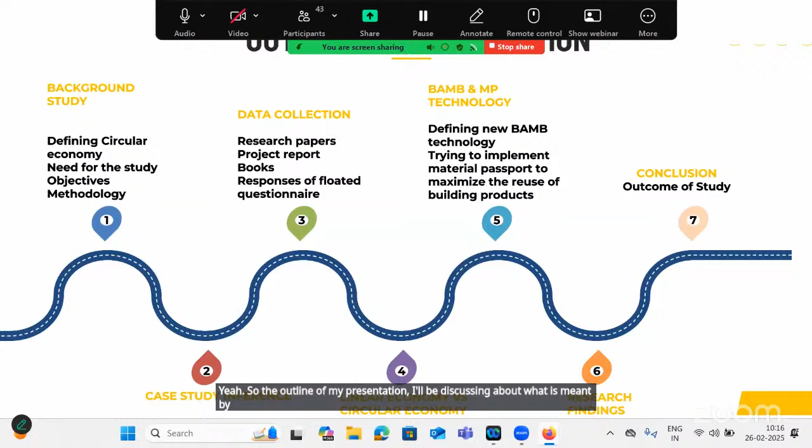So the outline of my presentation: I'll be discussing what is meant by circular economy, the need for this topic, and the objective of the study I'm taking up. Then I'll talk about case studies related to circular economy, how we procured and collected the data, and the difference between linear economy and circular economy. I'll also discuss the BAMB model, that is material processing and material passport technology, which is one of the unique things that will help with many initiatives in this area, and I'll highlight our research findings based on this study.

So, present waste management practices. This is a common waste management practice that most sectors adopt. We procure the material, manufacture it, develop it, and then after manufacturing, the material is used for different activities. After usage, the material reaches the landfill. So in all sectors, not just one, this process happens in a linear way, not a circular way.

This linear way process, due to technological development and modern materials in practice, includes many hazardous materials coming into the picture, creating an enormous amount of environmental impact and damage to the system. This is one of the very important things that compelled us to think about an alternative, and that alternative is circular economy, which I am going to highlight. Because in this linear economy process, it not only creates environmental impact and ecosystem damage, it also increases the volume of landfill, which is another major issue happening in most cities and towns.

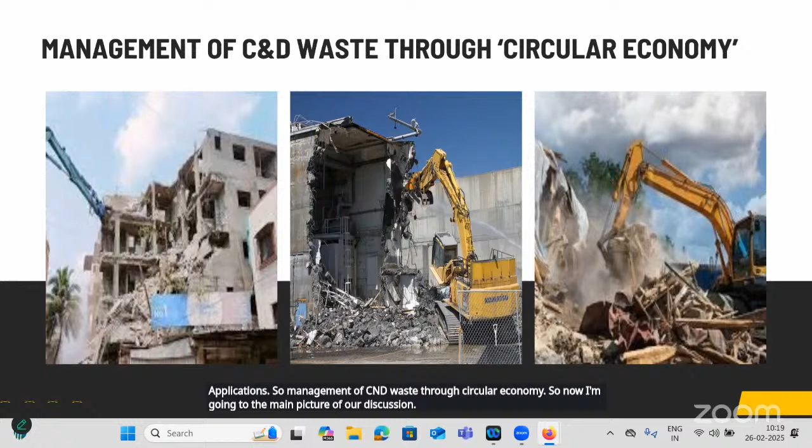So, management of C&D waste through circular economy — now I am going to the main picture of our discussion. Traditionally, construction industries follow a linear economy, meaning materials are extracted, used to make a product, and disposed of in landfill at the end of its life. Several attempts should be made to transform the industry from linear to circular system, similar to the natural world, where there is no waste. One organism's waste becomes another organism's food, because there is no landfill in nature.

As I already pointed out in my previous slide, the main significant advantage and importance of circular economy is that we have to reduce the waste reaching the landfill. That is one of the very important things we have to keep in mind. So keeping this in mind, we have to find a way how that can be possible.

So that is why we are trying to enforce the circular economy, and it can be achieved by adopting triple R, adopting 5R formula, and all these things are possible to implement the circular economy in construction and demolition waste management.

So what is the reason why we have to think about it? This is because even recent studies point out that only 1% of construction and demolition waste is recycled out of the huge amount generated. Maximum waste generation is reaching the landfill. Another pathetic condition is that in towns and semi-urban areas, it is not even reaching the landfill - it is just dumped in barren land and in low-lying areas without any proper permission.

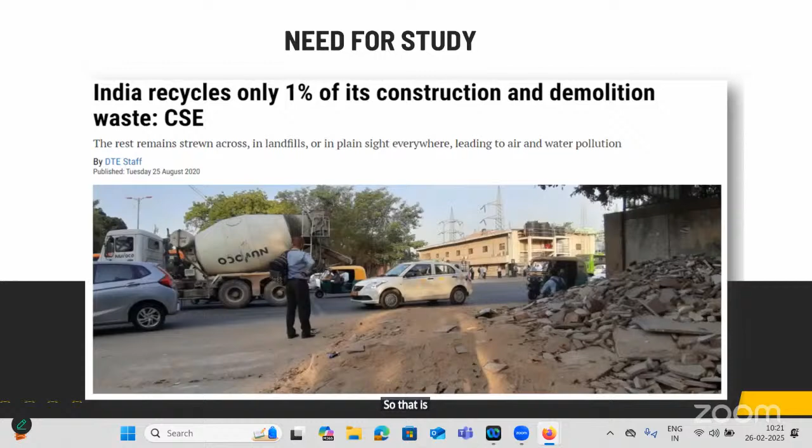So what are the objectives? The three objectives highlighted here: to compare C&D waste generation in linear economy and circular economy, promoting the reuse and recycle of existing building material products - how that can be converted into useful products - and establishing the material passport platform, which will help various actors in the construction industry access the data.

Product availability, its quality, and its manufacturer, etc. So the technique I am going to explain, what we have carried out and produced, can be taken up further by any researcher or corporate, and they can implement it in a realistic way to achieve circular economy in the real situation of C&D waste management. I hope that is possible by this discussion.

It can be achievable. So the C&D waste scenario in India - this is a thing everybody knows. The study showed that about 90% of the C&D waste can be reused in productive and profitable applications.

The very important and significant aspect we have to keep in mind, as I already pointed out, is that before constructing the building, during the process of manufacturing the material and designing the building itself, we have to think about circular economy strategies - how the material and product can be reused, recycled, and refurbished. The 3R needs to be kept in mind during the stage of designing the building and also during the stage of selecting material for construction activities.

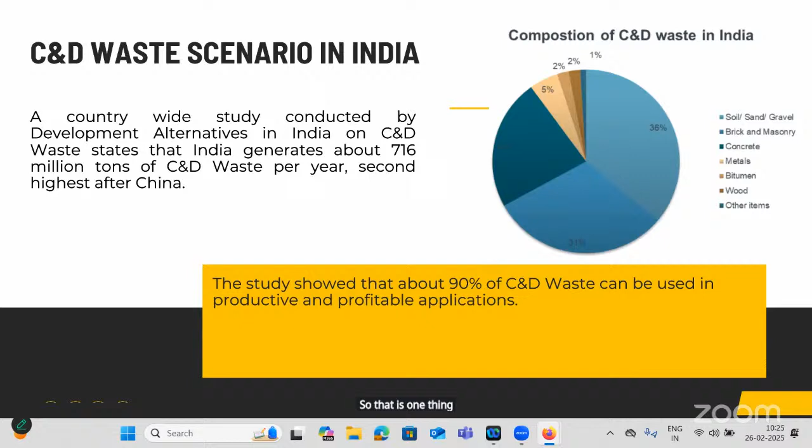According to the Ellen MacArthur Foundation, circular economy ensures that products, components and materials retain their maximum value and use. If you think about our day-to-day activities, we use n number of products. If you categorize how many products we make maximum use of, even in day-to-day activity, a simple example is the mobile phone.

If you think about the mobile, when a new version or new product comes out, we don't think about what will happen to the old mobile. In some cases the old mobile is exchanged or recycled, that is fine, but in many cases maximum utilization of the product is not happening.

Even the packaging material, when we order something online, different types of packaging materials are used. But whether that packaging material we are disposing of is properly managed, properly reused or refurbished, is not clear. That is one reason it is necessary that we think about the circular economy concept.

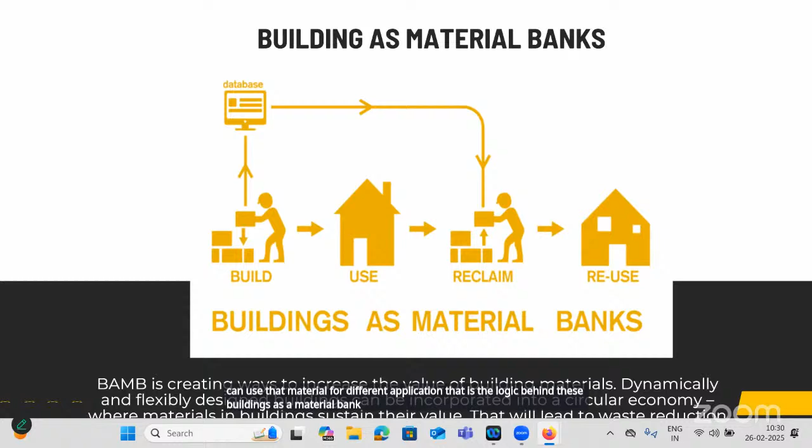We wanted to find out the awareness level of the people. We identified different stakeholders and developed a questionnaire, floated it among the different stakeholders, collected the data, and analyzed it. Based on the data analysis, we divided the stakeholders into different categories.

More than 206 responses we received based on the survey. We also conducted expert interviews from people working in the construction sector and C&D sector, and then we arrived at the outcome.

But in the present situation, the salvage value itself is not properly calculated, and the salvage value of the material is not properly analyzed or studied. This happens because they want to complete the project faster and achieve it within a short period of time, so they never think about these initiatives.

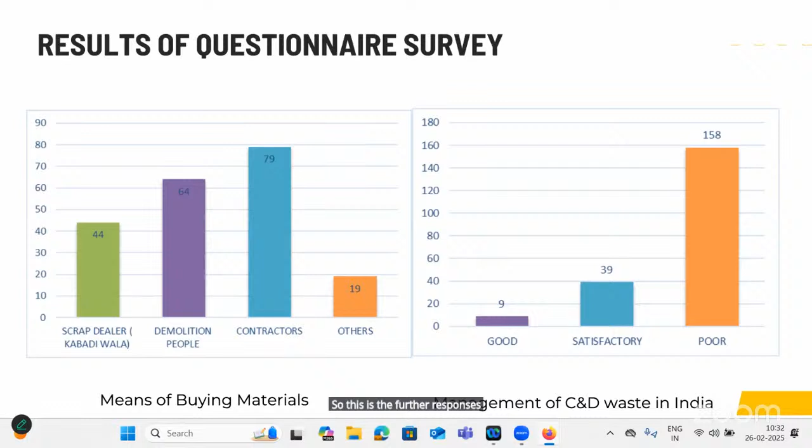Most people are not at all aware about circular economy, building materials as a material bank, or material passports. Some of those who are aware are from cities, research organizations, and postgraduate students - only they are aware about that particular thing. Most people don't have any clarity with respect to this aspect, and that is an important finding I want to present in this forum.

Then, what is material passport? Material passport is a document containing a detailed inventory of all the material resources and components of a product or building, as well as detailed information about their location, providing material with identity regarding their current use, so you can categorize the material.

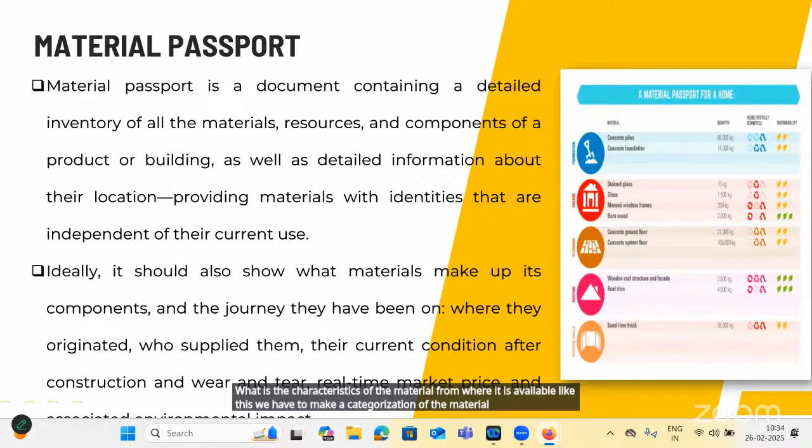Before jumping into action, it is necessary that we first identify - and in my presentation I'm going to highlight how it's possible. We have to find what is the type of material, what is its value, how much salvage value it will give, what are its characteristics, and from where it is available. Like this, we have to categorize the material and then develop this thing, so you can find out how it can be possible.

So this is another important way - buildings as a material bank. In this vision, the building itself is considered as a materialized savings account. You have to see the building itself as a savings account, that is why I mentioned it as buildings as a material account, material bank.

The material resources through which building materials, products and components are temporarily deposited into a functional element are part of the building. By harvesting materials and parts during deconstruction and renovation of the building, these materials can be reused in the construction, operation or refurbishment of other buildings, thereby reducing the need for primary resource mining.

So automatically now the resource recovery is achieved by means of this. I'm highlighting, in our today's panel discussion, important aspects that were highlighted in the topic: one is resource recovery, second is circular economy, and third is waste management. By this particular initiative, this particular study, this particular method, it is possible, and it was proven in many countries that we can achieve all these three. Circular economy can also be possible, resource recovery also can be possible, and we can also reduce the waste. Waste management can be effectively done.

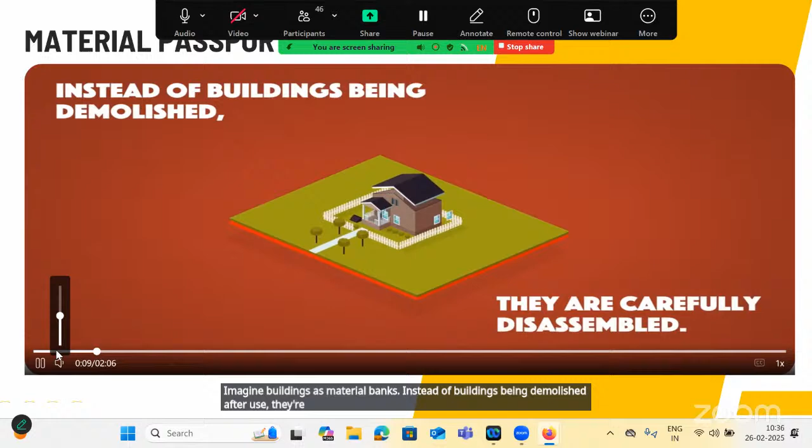Instead of buildings being demolished after use, they're carefully disassembled. Their parts are reused or recycled at the same or even better levels of quality. Instead of the traditional take-make-waste system, this supports a circular economy, where waste no longer exists.

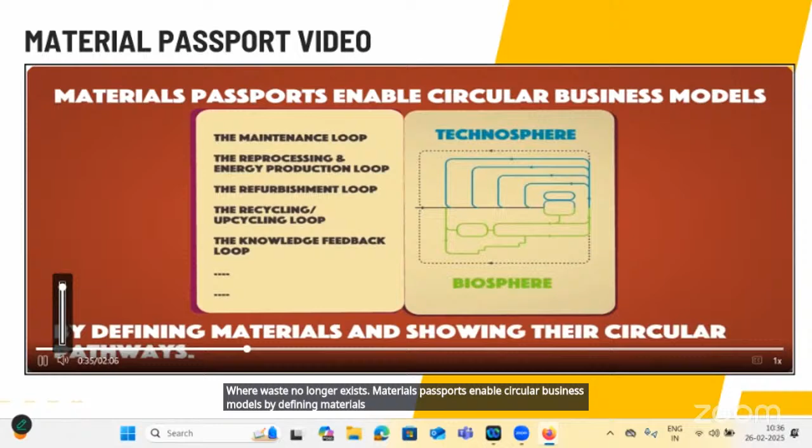Materials passports enable circular business models by defining materials and showing their circular pathways. Suppliers, builders, architects, users, and next users all provide and retrieve information through a digital platform. The goal is to put materials in continuous loops of use and reuse.

For instance, the maintenance loop: materials are maintained properly so their use period is maximized and the value for recovery is ensured. The reprocessing and energy production loop: biosphere materials can be safely cascaded into new products before they eventually re-enter the biosphere through incineration or composting.

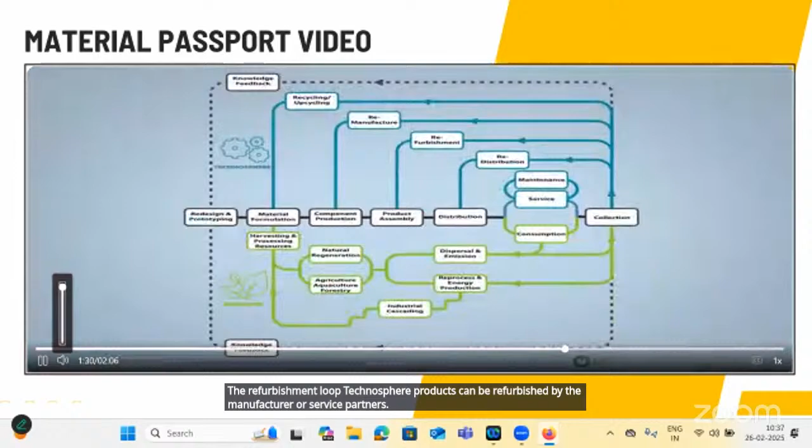The refurbishment loop: technosphere products can be refurbished by the manufacturer or service partners. The recycling or upcycling loop: technosphere materials can be recycled into new products while maintaining or improving their quality.

Many products are not yet designed for circular use. The Passports platform provides a feedback loop so everyone can optimize their materials, products, design, and services for better circular use. Materials passports, enabling the transition towards a circular economy.

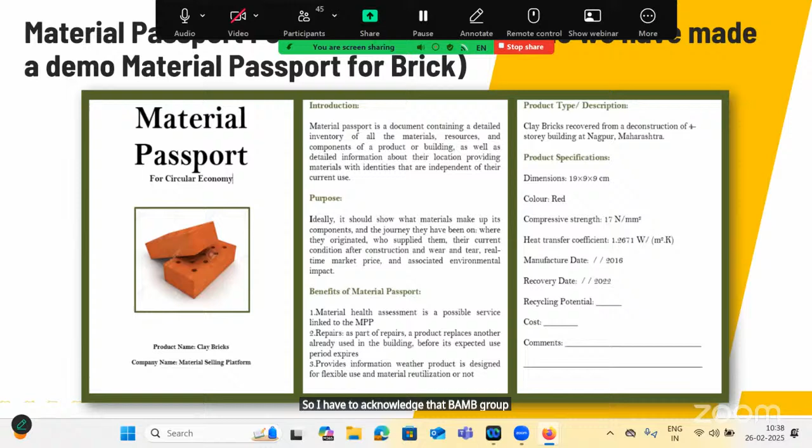So I have to acknowledge the BAMB group who have developed and created many initiatives with respect to this material passport and how circular economy can be possible in the waste management sector. But even though much advancement has been done in this area, the awareness level with respect to this particular concept in our country is very low, and there is very little patronage for this particular thing.

So it is one of the excellent ideas and concepts to transform into a business, because it is like how we purchase from Big Basket and other online grocery platforms and products. In the same way, the building material can be categorized like this, and a platform can be created, exclusively for salvage, that is demolished material.

But it is necessary that the material we are demolishing needs to be properly source segregated. That's why I said source segregation is a very, very important thing. We have to do the source segregation before jumping into action. And then the next important thing is we have to identify the characteristics of the material we are demolishing. If we don't know the characteristics of the material, then it is not possible to achieve all these things.

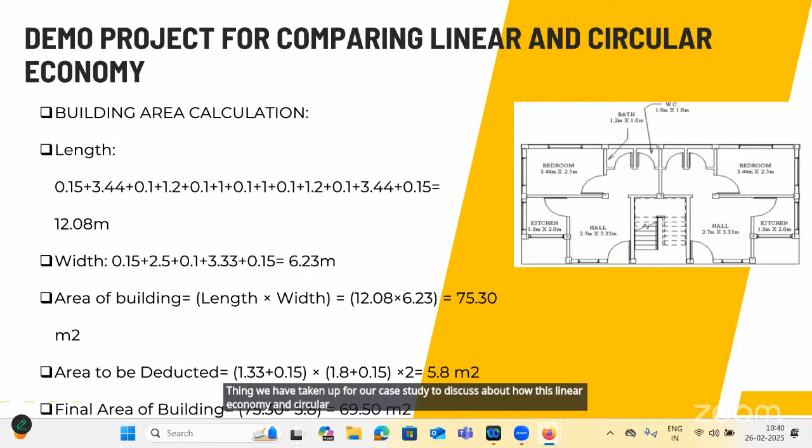Then we have calculated the C&D waste. This calculation was done based on TIFAC. There is a thumb rule by TIFAC, so we have considered the thumb rule, and based on it, we have estimated the quantity of waste generated and the quantity of waste that will be created from this demolition. So we have created this.

And then what we found is the research was conducted as a study on the Indian construction industry. The first and main important outcome is that in a linear economy, all the waste quantities get dumped near roadside, riverside, or near vacant land.

In linear economy, all the waste quantity gets dumped near roadside, riverside or near vacant land, and in some cities it reaches the landfill. It ultimately creates impact on our environment and makes higher raw material usage for new materials. This linear economy leads to more environmental damage, more ecosystem damage, more mining, and more raw material required for manufacturing new material. Therefore, it is high time to think about how that can be changed.

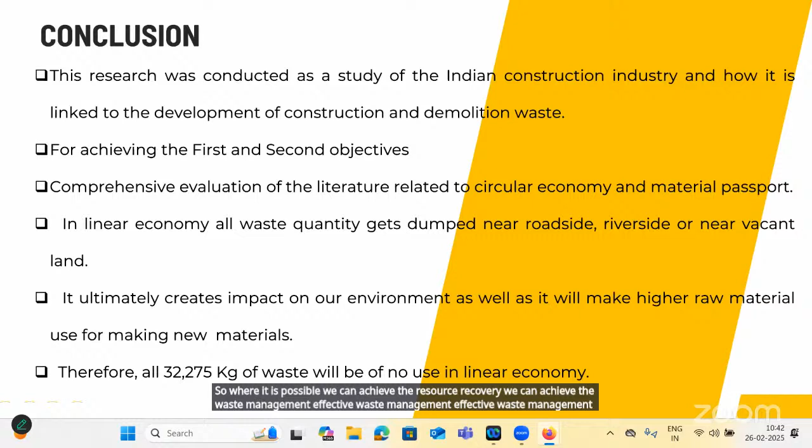So the only way is circular economy and the BAMB model. Where possible, we can achieve resource recovery, effective waste management, and convert the product into useful material. Circular economy will not only reduce the amount of C&D waste, it will also help countries achieve the target of net zero. The emissions will drastically reduce. So these are all several advantages when we try to adapt and implement the circular economy.

There are 41 single flush doors and 56 windows in our case study. We can extract them and sell them through a material platform website. I have given an example here of how we created this based on the case study. I'm highlighting this in the presentation, but it can be transformed and converted into a major revenue generation business.

For example, before demolition of the structure, we can extract the bricks which are in good shape and have adequate strength - that's why I mentioned source segregation. So total number of bricks used, out of 13,220 with respect to this case study area, it is possible we can get at least 70 to 80% of the material for further application. Then, importantly, we can sell some of the bricks through our material selling platform website and earn good money.

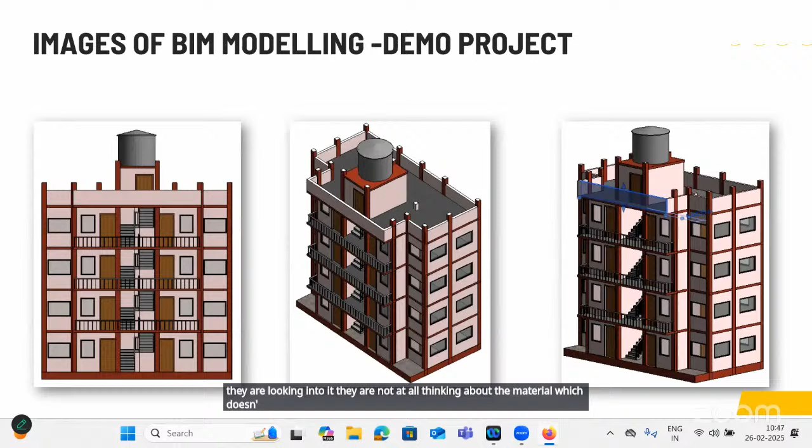So you can see here, this is the way it can be categorized. These are the different materials, and we can categorize the material and properties. All these things are achievable.

Once this is done, it is very easy to implement and follow the circular economy process, starting from the initial stage, building construction stage, to the demolition stage. It can be easily achievable.

That is why I said adopting 3R - reduce, reuse and recycle - is a very easy and simple mantra which can be implemented. This mantra will help implement circular economy, effective waste management, and also help achieve resource recovery.

So these are some of the outcomes we achieved through our research study. This is the initial characteristic of the thing, and this is available on Google Scholar. If somebody is interested, you can look into it and refer for further information with respect to this study.

We are trying to connect the cost aspect also in this particular study. Presently, the study is in progress. And this is the thing which got published in a research journal - a very famous and good high impact factor research journal. We have published this particular thing.

So how the building material can be converted into building banks, that is material banks, and how the circular economy can be implementable and made into a reality.

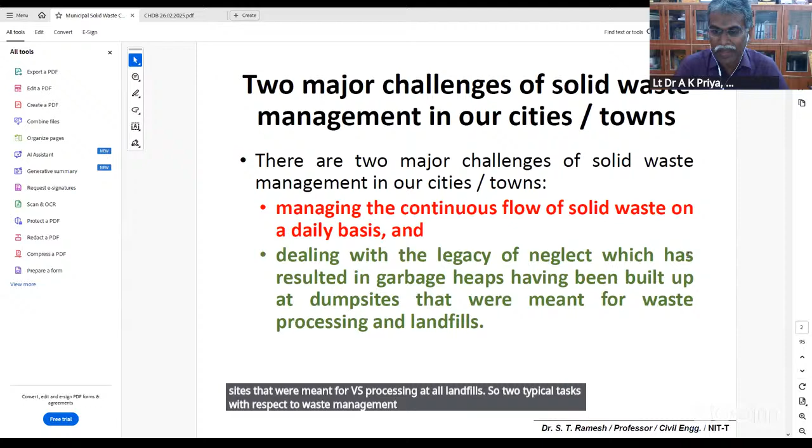So there are two typical tasks with respect to waste management: one is about daily management of solid waste, and the other is about management of legacy waste. Dumps have grown larger and higher, becoming a point source of pollution.

That's what everywhere they have started looking into. Dump sites are the major source for generation of greenhouse gases, especially methane, which contributes greatly to global warming.

There are a lot of incidences here and there: migration of leachate into groundwater, which pollutes the groundwater, and frequent fire outbreaks at the dump sites leading to air pollution. We've heard about so many difficulties in urban local bodies, especially in cities and smaller urban local bodies, with respect to leachate and fire outbreaks, which are very common in open dump sites.

These are all the possible threats posed by landfills. I think you're already familiar with the system—we don't follow proper landfill practices for solid waste disposal. We simply call them dump sites, without any liner or daily cover at daily closure. Because of that, there's a lot of leachate generation; infiltration of rainfall into the system leads to generation of leachate and migration to the groundwater.

Groundwater contains so much pollutants, and normally the leachate characteristics depend on the type of waste disposed in the dump. Recent studies have demonstrated components like phenol, toluene, benzene, polychlorinated biphenyls, ammonia, dioxins, chlorinated pesticides, metals, and other chemicals entering the groundwater.

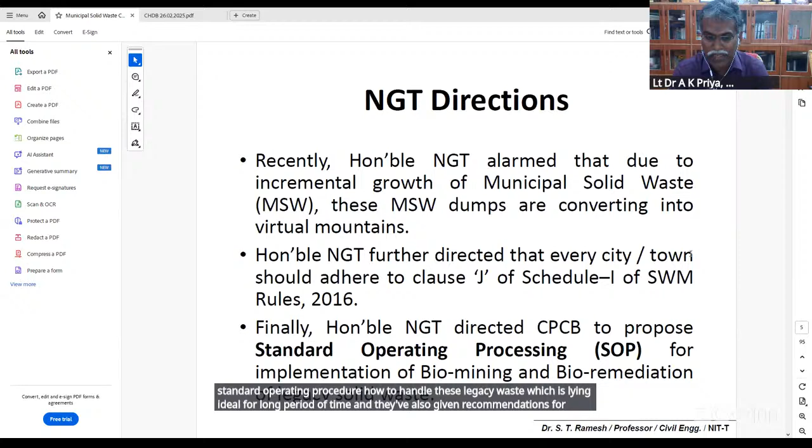You should know the rules and regulations of Solid Waste Management 2016, and when time permits, you can also read them. It clearly spells out how to manage legacy waste effectively, and the different fractions involved. Let me highlight the important duties and responsibilities of local authorities and village panchayats or urban agglomerations, focusing only on the important points with respect to the Solid Waste Management Rules 2016.

It clearly says local authorities and panchayats should investigate and analyze all old dump sites and existing operational dump sites for potential biomining and bioremediation. Wherever feasible, they should take necessary actions towards biomining or bioremediation of contaminated sites—this is already mentioned in the 2016 rules and regulations.

If the biomining option is not possible, they also recommend going ahead with scientific closure or capping of the landfill, thereby preventing further damage to the environment. So these are the two clauses.

Different governments, especially Tamil Nadu, Kerala, and Andhra Pradesh, and other parts of the country, have started looking into biomining as well as landfill mining or capping as better options to take care of legacy waste and other issues.

This law has also been mentioned very clearly in the regulations—it's not only for urban local bodies, it applies to outgrowths in urban agglomerations as well; they should also adhere to these rules and regulations. This includes cantonment boards, panchayats, industrial and institutional townships, railways, and defense establishments. Whatever I discussed earlier in the subclause is also meant for these organizations.

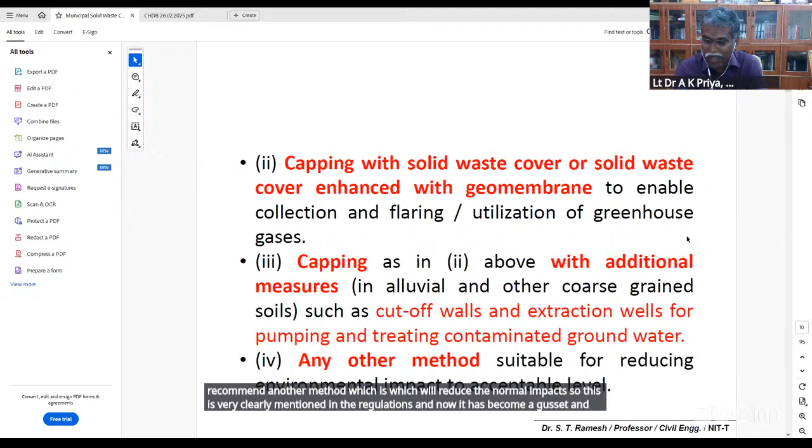Now it has become a gazette, and urban local bodies have to mandate the requirement mentioned in the Solid Waste Management Rules 2016. It is very clear, and they have mentioned two logics: you go for bioremediation and biomining, and before that, you make sure you also survey and assess the total waste lying idle in a legacy waste dump site.

There are a lot of challenges to go ahead with total station survey or drone mapping, and it's somewhat difficult with dumped waste below the ground. Some places it's disposed in a quarry or low-lying area where we may not be able to showcase when it started or assess quantity, because after project finalization, for mining or capping, payment to the contractor is based on volume. It's very difficult to estimate that volume.

They have mentioned very clearly you can go either with total station survey or drone mapping, and then do a precursor study with the history of the site and extensive composition analysis. Thereby you can recommend either mining or capping. That's the logic they've given.

They have also mentioned clearly that you should follow some normal parameters to study the existing condition, or baseline studies, which includes soil already contaminated with heavy metal, and thorough analysis of water. You should also be familiar with rainfall details in the locality, soil type, surface hydrology, topography, and wind direction.

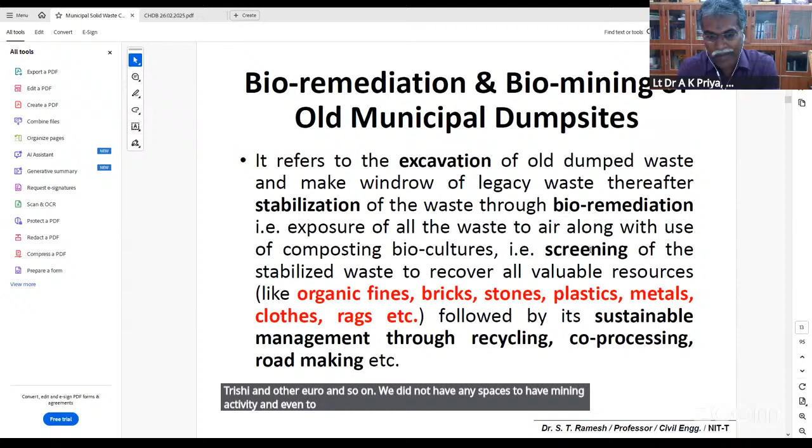Once disturbed, it becomes huge in volume, and handling this huge volume of legacy waste is very tough. It's somewhat difficult to fix how to go ahead with the mining process for a larger site, especially for Trichy and Erode and so on - we did not have spaces for mining activity or even to store segregated material. This is a big challenge with respect to mining projects.

These are the processes or steps clearly mentioned: go for excavation and stabilization of the biomass. We felt all the legacy waste has already been stabilized or partially stabilized, so there's very little scope for further stabilization with organic matter and complete remediation through augmentation of microorganisms. Remove the moisture, bring it down to less than 20 or 25%, and take it to a trommel mill.

And they have a set of sieves or screen openings where you could separate these materials in a segregated manner. Thereby, you could go for sustainable practices through recycling and co-processing. That's what they have given.

So this is the overview, and in the SOP they have mentioned very clearly: mining, okay, you can start, no issues in that, but before that you have to stabilize the complete waste lying on the site by adding biocultures, or you can blow some sort of aeration. You enhance aerobic degradation of the organic matter, then go ahead with the screening of waste.

And there are two major fractions. Whatever is more than 150 mm, I could make it very easy because these sizes are very big. And 30 to 80 mm normally goes directly to industrial needs as a supplementary fuel. We call it refuse-derived fuel.

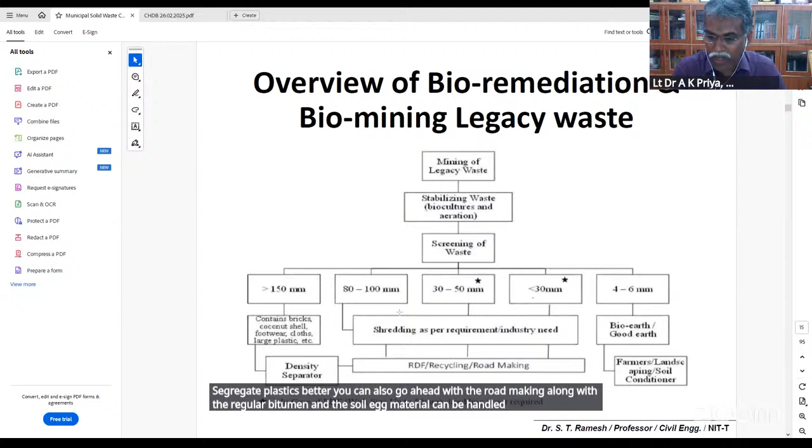So this is what I've explained earlier. The first step is to loosen the solid waste, as I already mentioned. The existing legacy waste dump sites have a compacted density of about 0.9 to 1 ton per cubic meter.

Then for the stabilization actions to happen, you have to loosen the solid waste and bring down the density to almost 0.5 to 0.6. Imagine our situation—if you loosen it, volume is one factor, and it becomes possible for infiltration during any heavy rainfall. Managing the solid waste during rainy days was very, very challenging.

Then the second step, to enhance the stabilization activity—in some cases there could be partial degradation of solid waste, and you can also add biocultures to enhance the composting process. This is called bioremediation, and you can dry the segregated solid waste after bioculture or biostabilization, making it amenable for screening and so on. This is the second task.

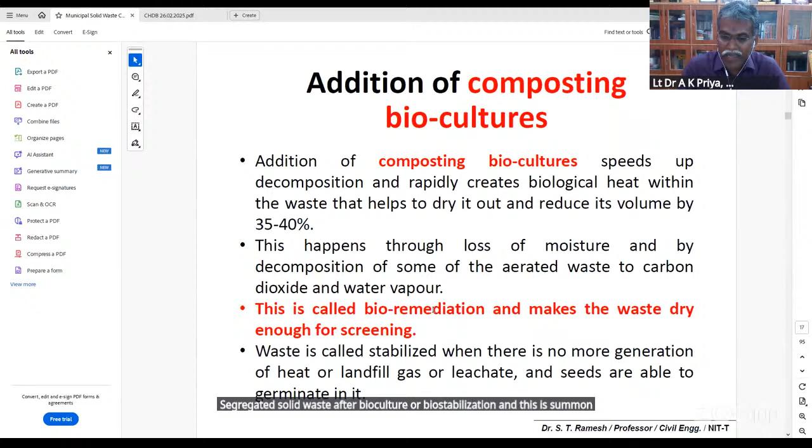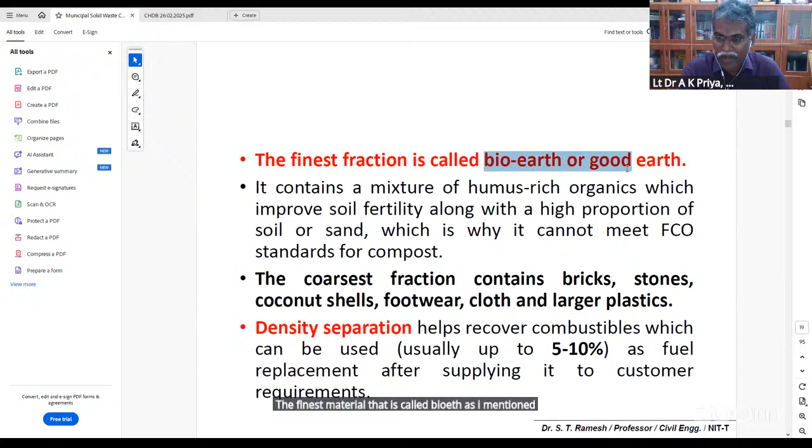Thereby, I could separate large amounts of material. The finest material is called bio-earth, as I mentioned earlier, or we now simply call it soil-like material, because it is similar in all respects, but it's not soil, it's a soil-like material. Coarser fractions like brick, stone, coconut shell, footwear, cloth, and other larger particles or plastics will go directly to recycling agencies.

And in the plants, we also have density separators. We could separate the combustible matter, almost 5 to 10%, which is in the legacy waste. Then lighter fractions, as mentioned earlier, mainly predominantly plastics, maybe it lost its value or may have some use. The government has given recommendations that it can be used in hot mix plants, and thereby it can also be laid on roads, so-called plastic roads, as you may have already heard about.

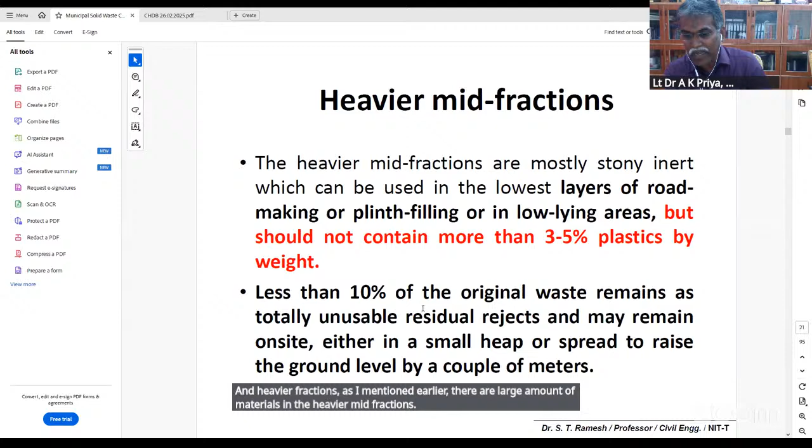And the major portion, what I call refuse derived fuel, will directly go for co-processing in the cement kiln. If it is more than 50 mm, it may require shredding. Less than 50 mm, you may not require any shredding, directly packed and given to a cement kiln for complete destruction. Heavier fractions, as mentioned earlier, there are large amounts of material in the heavier fractions, and sometimes it will also go for landfilling and so on.

Getting into the site, there are different ways mentioned to stabilize the organic matter. Without stabilization, segregation is not at all feasible. And if I do segregation without stabilization, it may create a lot of problems of environmental degradation. So they have given different logics to go ahead with the stabilization activity.

Number one, biomining through a tractor tiller by windrows in the site itself. Or you can go for biomining through a trench method, or biomining through a cone, or they may insist on the windrow method for very spacious landfill sites. And lastly, you can also spread the legacy waste in a thin layer, one layer and above.

By looking at the points, it seems very easy. But when you get into a real site, the stabilization of the biomass is a very, very challenging task. Imagine our situation in Trichy, we have almost 47 acres of land, and we don't have even space to form the different windrows to stabilize the organic matter.

You can spread the legacy waste to a depth of 150 mm, and mist-spray with biocultures. If there are larger objects, you can hand pick them and form windrows for the remaining waste. Turn the windrows every 5 to 7 days, and after 6 weeks, you can go for simple screening methods.

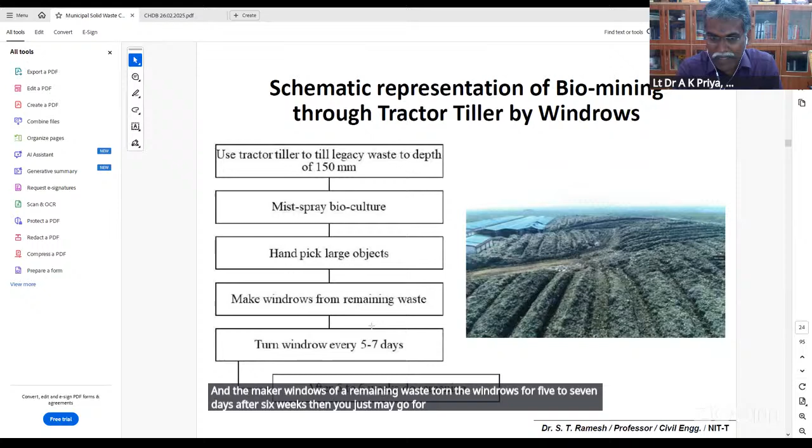It has also been mentioned that besides the 150 mm layer, you can also go for trenches, almost 1.5 to 2 meters deep, or even 2 to 2.5 meters in the site itself. You can spray the biocultures in the trench, then form a windrow and turn the windrow for 5 to 7 days.

Then after 5 to 6 weeks, the stabilized biomass is taken into the screening area for segregation of solid waste. We also tried the cone method in Trichy because it is easy to do.

You can drop the solid waste from 2 to 3 meters height and form a cone, and mist-spray with bioculture. Every 2-3 days, you turn the cone to aerate it, and after 5 to 6 weeks, you do a simple screening.

The windrow method is again very common. If the landfill site allows, you can form parallel windrows throughout any vacant areas available, then turn the windrow on a weekly basis. You can also mix 2-3 windrows together.

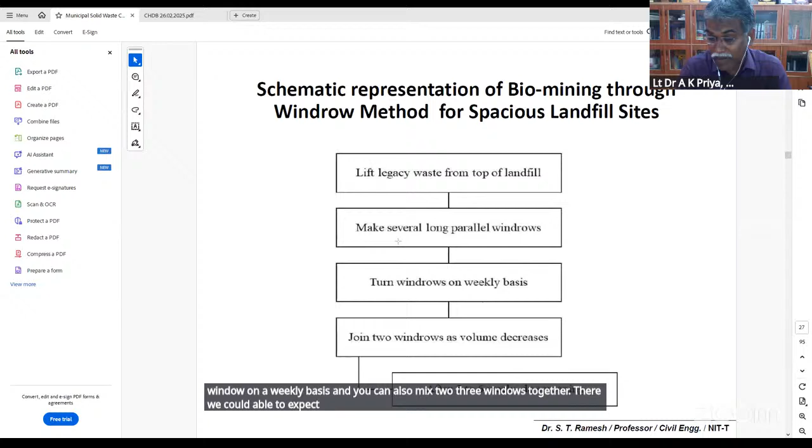There we can expect a volume decrement, and after 5 to 6 weeks you can go for simple screening methods. And for the thin layer method, if the landfill site meets your space demands, you can also plan for layer by layer spreading.

You spread over the solid waste, the legacy waste layer and layer above, and turn the windrows. Then mist-spray the bioculture, and after 5 to 7 days, go for a complete turning in. After 5 to 6 weeks, then you go for a screen.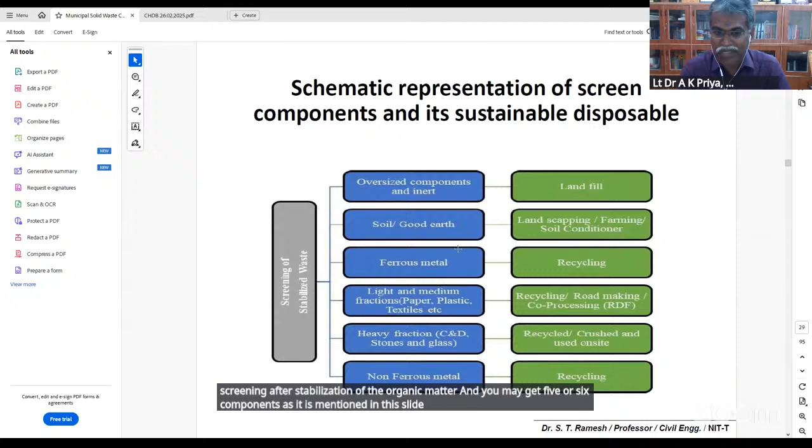So this is the complete sustainable disposal of the legacy waste, as mentioned very clearly. Then just go for simple screening after stabilization of the organic matter, and you may get 5 or 6 components as mentioned in this slide: oversized component, good earth or soil-like material, ferrous material, and light and medium fractions. We could find different types of plastics in the legacy waste, heavy fractions like construction and demolition waste, and non-ferrous metal.

They also recommended going ahead with recommended disposal options. Oversized material will go for a secure landfill operation. Soil-like material, if good with nutritional value, will go for landscaping, farming, or soil conditioner. Ferrous will go for recycling, and plastics will go for RDF in a cement kiln. C&D waste will go for recycle and also be crushed and used on site. Non-ferrous material will go for recycling.

So this is the model we have followed for most of the cities I've experienced in, like Trichy, Erode, Tuticorin, even Tirunelveli and also Salem, and we have done for a capping process. This is the typical model where you can manage the complete legacy waste without much difficulty.

The MSW dump sites, or we may simply call them abandoned sites or legacy waste, are enhanced by bioremediation and also biomining activity by the appropriate agency appointed. We may get different products like RDF, recyclables, and compost, and the inert material, the soil-like material, along with recommended disposal options like cement industries.

Recyclables will go to respective authorities, compost will go for landscaping and marketing, and rejects will either go for low-lying fill or some sort of scientific landfilling activity. So thereby I could be able to close the continuous representation as an operating model. That's what has been recommended, and we have followed this model in different sites.

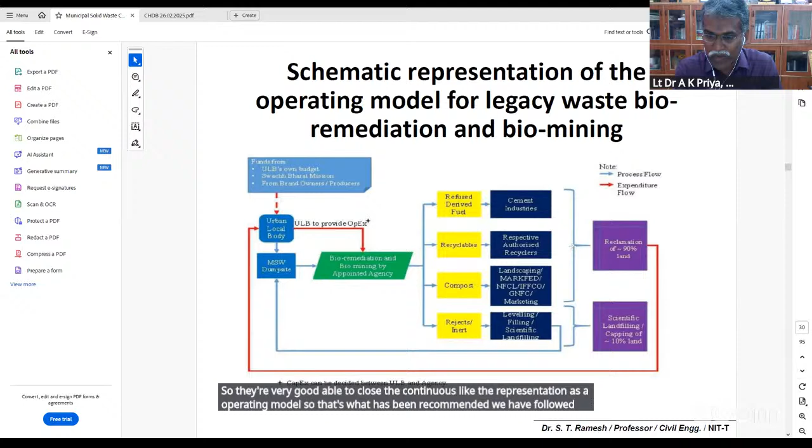Okay, let me go on. Probably you may appreciate later the effort we have taken in the biomining activity for some of the sites. I may be presenting phase 1 results and studies from my experience in Trichy, but not all together. The project is still going on, and we are also moving into a circular economy kind of approach, going for technology transfer demonstrations and so on. I'm probably not able to share all these details, but whatever we have done in biomining activity, I'll be sharing.

The site investigation study area, you would have heard about it, is on the highway, Ariyamangalam, about 13 or 14 kilometers away from the main Trichy area. Its population as per 2011 status is about 9.17 lakhs, and total waste generation is about 450, now reaching almost 550 to 600 metric tons. Total waste collected is only about 80%, and the method of collection is door to door, with disposal only to a landfill dump yard.

Otherwise it is named as Ariyamangalam Compost Yard. Earlier it was a compost yard, now it has turned into a legacy waste storage. Trichy in particular has insisted heavily on door-to-door collection; only the leftover material which is not biodegradable comes to the site. Others go directly to a decentralized composting facility. I think in the city we have almost 55 to 60 decentralized composting yards.

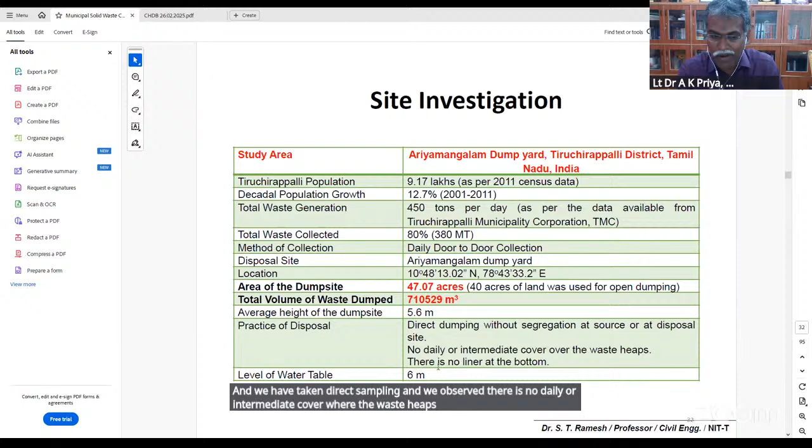The site is 47 acres, adjacent to a highway. In phase 1, we assessed 7.1 lakh cubic meters of solid waste, and it extended to phase 2. In phase 3, we gave a technical report to mine the solid waste below the ground. The average height of the landfill site is about 5.6 meters. We took direct sampling and observed there is no daily or intermediate cover over the waste heaps, and no liner at the bottom. The water table is below 6 meters. So this is about the site investigation.

Now you can look into the dumping site, and it is almost all legacy waste. I think it started way back in 1984-85, so it is almost 30 or 35 years old, and completely degraded, but it still occupies space.

As I mentioned, it becomes a virtual mountain, a solid waste mountain. We went with a systematic divide and conquer approach, as mentioned in the SOP (standard operating procedure) by CPCB. We had a lot of challenges on how to assess it. For example, in regular assessments like volume estimation of sand or mined material, it's very easy—you can use simple trapezoids. But here, it's not properly shaped like a trapezoid, so it is very, very difficult.

So we invited 4 or 5 different vendors to the site, and after seeing that it's completely packed across almost 47 acres of land, none of the vendors were in a position to execute the survey. I got a startup involved, and we educated the surveyor and explained the typical tasks with the mission projects under Smart City. They gave some positive thought and provided me with a status update.

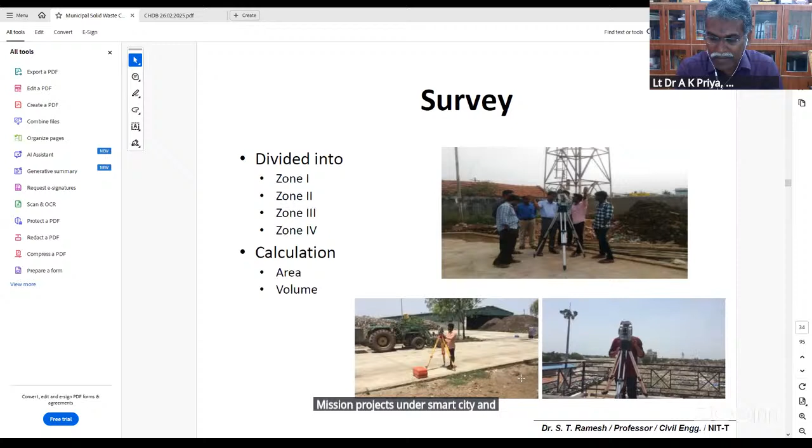So we also went with a strategic plan where we could identify zones where the legacy waste started—around '85 or so—by referring to old records. We divided the total 47 acres into 4 zones: zone 1, 2, 3, and 4.

We went with a typical survey using the total station, and we were able to assess almost 7.1 lakh cubic meters. I think this was in the pre-feasibility study report given around 2018, just before corona. We demarcated the boundaries for zone 1, zone 2, and zone 3 along with the volume. So with that, the first step was successfully completed.

We took almost 1 to 1.5 months to fix the boundaries as well as the different viewpoints and high points at the top of the landfill area or legacy waste dump area. We were able to pick up the points, plot them, and assess how much quantity of waste we had.

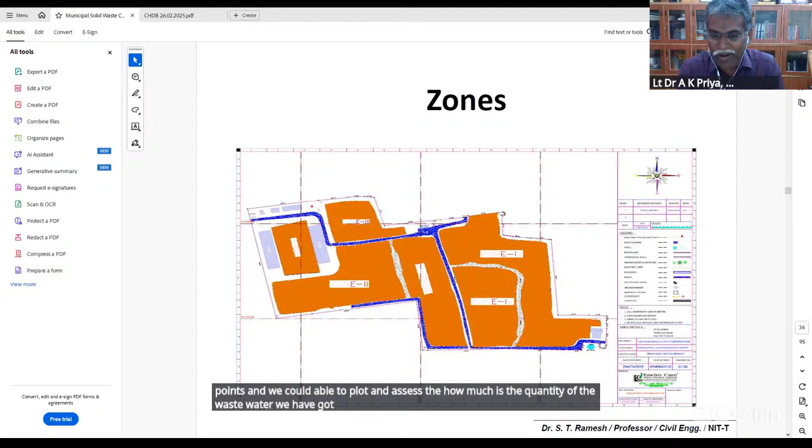The second important task was to convince the administration that we could go for mining. The typical logic is: if I do mining, I could recover as much material as possible and give the reclaimed land back to the corporation. Thereby, the 47 acres of land can be used for some other purpose.

Regarding solid waste sampling, some literature simply suggests auger boring, machine boring, or simple open pits. But none of these techniques were useful here—it is very, very difficult.

We went to a maximum of almost 3 meters depth with the backhoe, and we were able to take samples at 1 meter intervals. These were labeled and brought back to the institute for consideration, and we assessed the composition of the past deposited waste—for example, waste that was maybe 15 or 20 years old.

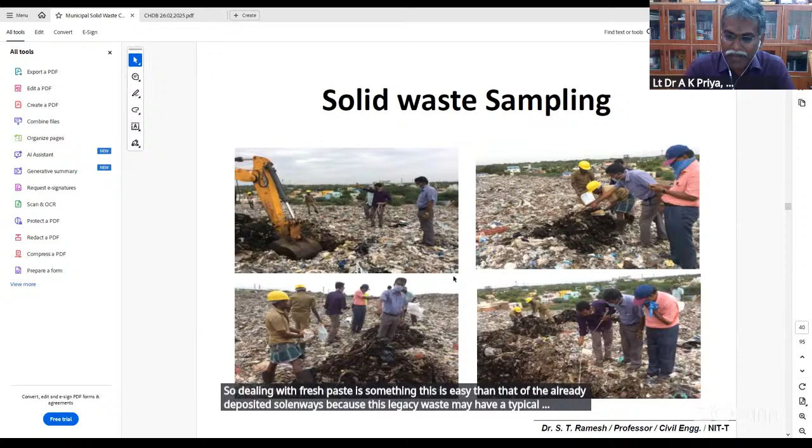We also characterized the solid waste once identified. Dealing with fresh waste is easier than already deposited solid waste, because this legacy waste may have typical components and parameters with respect to depth. That is very challenging. So we brought samples to the laboratory and did extensive work.

We performed segregation practices and went through literature on what has been followed in developed nations. We came to a conclusion about the percentage distribution with respect to depth, and it was an appreciable, positive outcome that we could observe.

Almost 25 to 30% was resource recovery material, and other than that, a large amount was humus. Humus—initially we called it that, but now we've changed the terminology to 'soil-like material.'

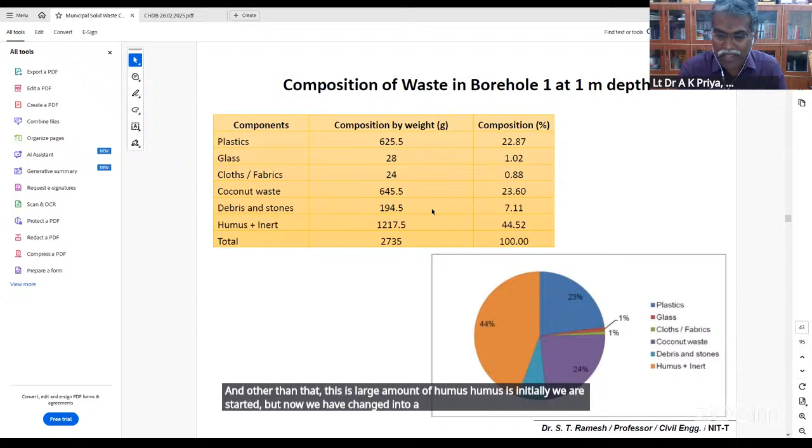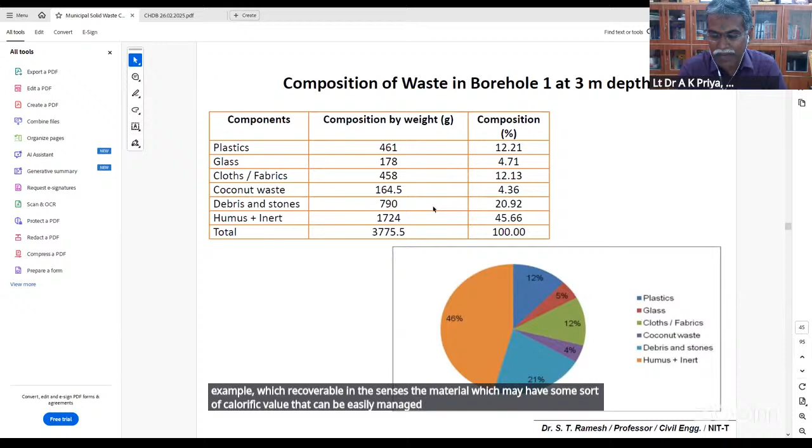In most cases, with respect to 1 meter, 2 meters, and 3 meters depth, we could see considerable portions of recoverable material—recoverable meaning material that has some calorific value, which can be managed in a recommended cement kiln or thermal exposure. That's our logic. We also projected the data with maximum and minimum values with respect to different fractions.

You could see on the left hand side different compositions. This composition is not fixed. With respect to depth, we could also find different fractions, and we have demarcated with different composition and projected. We have also gone with proximate analysis and ultimate analysis to showcase that we could go for mining activity, and after that take up important refuse derived fuel and soil material which can be further considered. That was our objective.

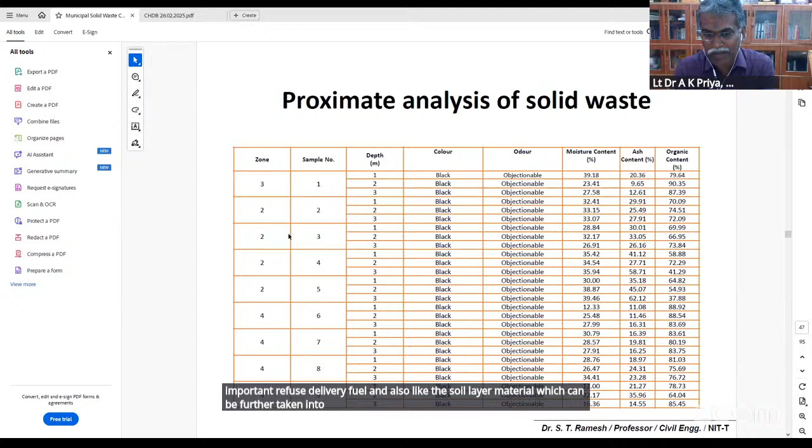NIT Tiruchirappalli gave a feasibility report as a proposal to Tiruchirappalli City Corporation, because the waste to be managed for phase 1 is about 7.5 lakh cubic meters. We projected this data to the government along with the possible approach we presented, and the government gave approval.

Yes, we can go ahead. They took 1 or 2 urban local bodies like a corporation as a sample, and allotted almost 49 crores to Tiruchirappalli City Corporation to execute the biomining activity. So the main point is it's easy to say, but we have a lot of challenges to go ahead. That's the logic they mentioned.

With this data we got the money, and the corporation identified the vendor. The vendor was also very new to the system, and we brought some new logics to waste management, supporting the vendor technically. One fine morning we started the biomining activity at the site.

The major task was that there was no space, sometimes, to even plan a 150 or 200 metric tons per day biomining plant. It was very, very difficult.

So we relocated one portion of the solid waste to another area. We could establish one initial plant of about 30 tons per day. Then subsequently it was added, and after Corona, for the complete closure of the legacy waste to the road level, we completed it within about 2 years with a specified target of almost 1,000 tons per day, which we achieved within 2 years.

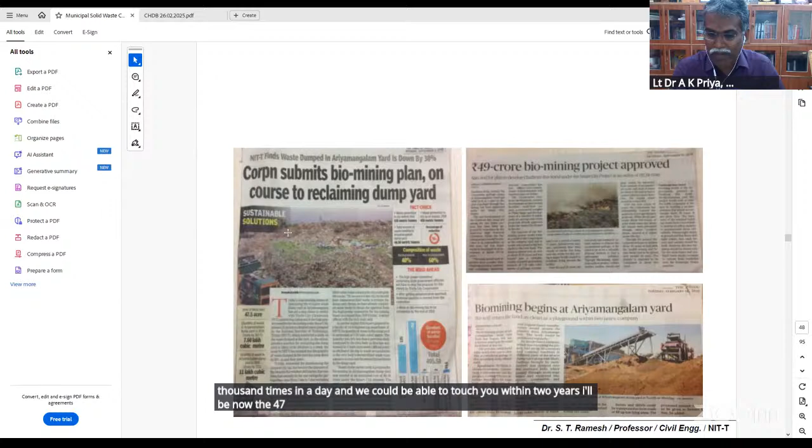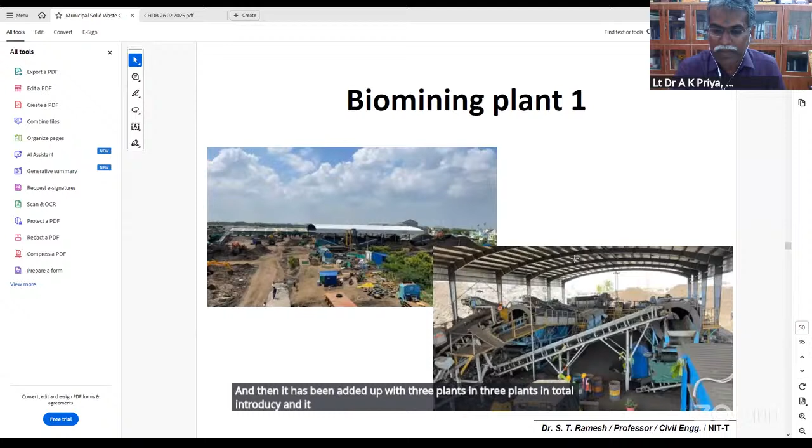Now the 47 acres of land has been completely recovered. This is the inauguration. What you're seeing on the right hand side is the relocated area, where we could install the initial plant number 1. Then it was added up with 3 plants in total in Trichy, reaching up to 1,000 metric tons per day of legacy waste.

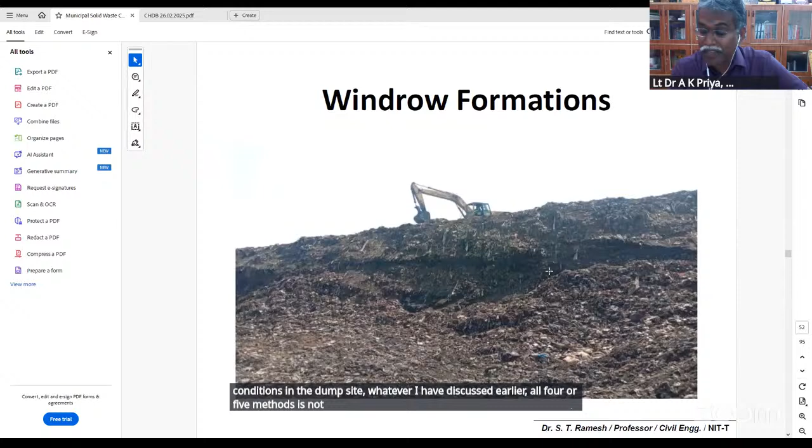These are all the plants we installed, and this is the initial condition in the dump site. As discussed earlier, 4 or 5 methods were not feasible to implement in the real field, so we followed windrow formation by the cone method. That was feasible.

Cone method is very simple: you disturb the solid waste and take it to almost 1.22 meters height with the boom line and drop it. Thereby the complete legacy waste gets loosened up, allowing oxygen entry and aerobic conditions in the system. Then you can expect some degradation, and you could see a lot of smoke coming out because it was already compacted to a density of 1 ton.

If loosened, there's a possibility of heat buildup too. We had a lot of difficulties, but luckily we did not have any fire, though we had a lot of difficulties in operation. We formed windrows like this by cone method and windrow turning, since we were also new to these systems, and we could achieve at least complete stabilization.

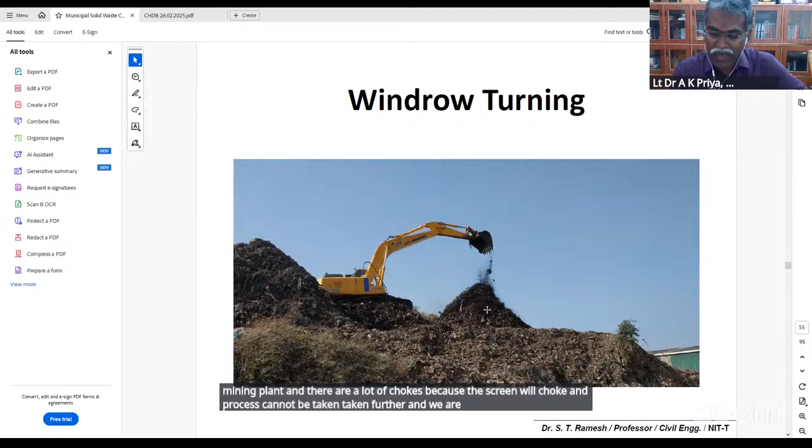Without stabilization, if taken into a mining plant, there are a lot of chokes because the screen chokes and the process cannot proceed further. We understood the situation and, as much as possible, eliminated the moisture content to up to 20%. In some cases we also sprayed deodorizer because it is near the highway.

Once you disturb the solid waste, there are inbound gases which also emanate from the legacy waste. It creates a lot of nuisance, so we have used deodorizer and bioculture in between, and to stabilize the organic matter, we have also done that.

After stabilization, it is brought to the mining plant where biomining is done. The problem is how to quantify the material again, because payment to the contractor is based on volume or weight. Initially they did not allow for a weighing basis, but asked us to go for simple volume methods, so payment to the vendor is made in terms of meter cube.

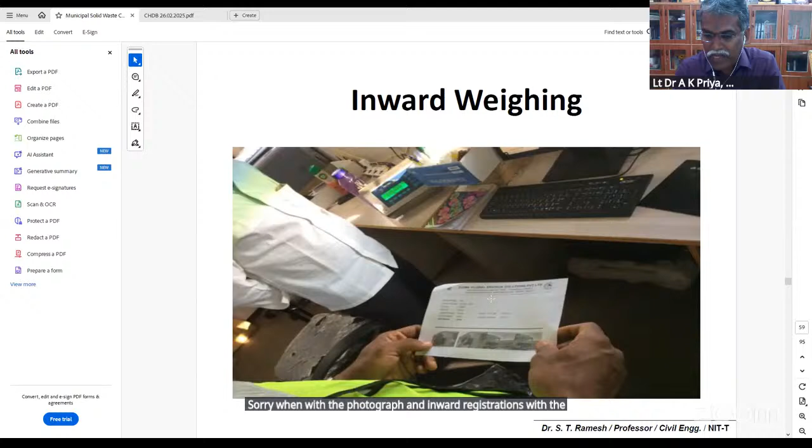There were a lot of challenges to quantify how much legacy waste is being mined and segregated, so we completely automated everything on site. Every truck that comes into the biomining plant is captured on video and photograph, with inward registration and vehicle number. They go for weighing, get into the biomining plant, come out and get an empty weight, and get a trip sheet. Everything is monitored with surveillance, and I could monitor from my office also.

Plant automation is done by the vendor, and every set of operations - you can see on the right side the SCADA operation - with conveyors, belts, and trommels, everything is automated. Thereby we could meet the demands.

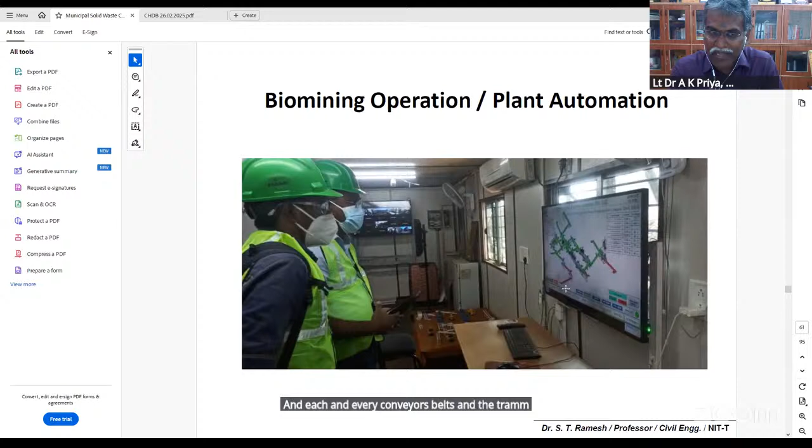We also created an ERP system where you can see the vehicle number entering, the trip sheet, the time it entered the system, the empty weight of the truck, the loaded weight, and the net weight. The net weight is again converted into meter cube terms, since payment to the vendor is in meter cube terms.

The Swachh Bharat Mission solid waste management rules mention the legacy waste compact density falls between 0.7 to 0.8, in some cases 0.75 to 0.85. We ensured that for every vehicle, we determined the compact density and loose density by taking samples from individual trucks. We had a big team monitoring every truck for the density of each load of legacy waste brought to the mining plant, making it easier to convert to meter cube for payment.

This is the procedure we established, similar to using a small box of 1 foot cube. Since that may not be sufficient, we would convert to a 1 meter cube box, repeatedly weighing multiple times to find the density of the sample.

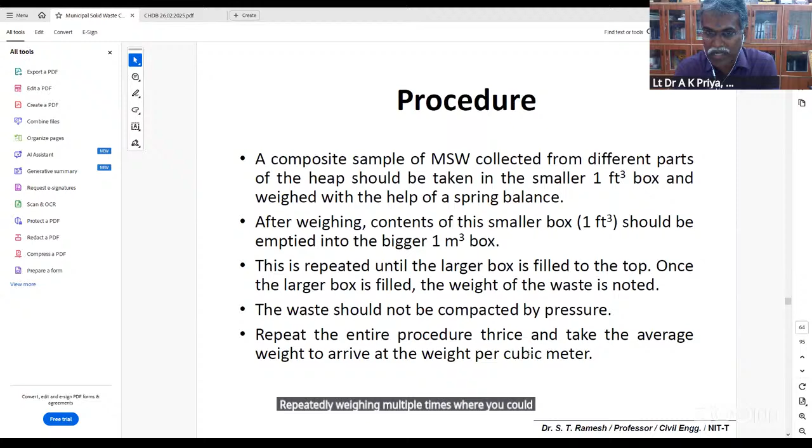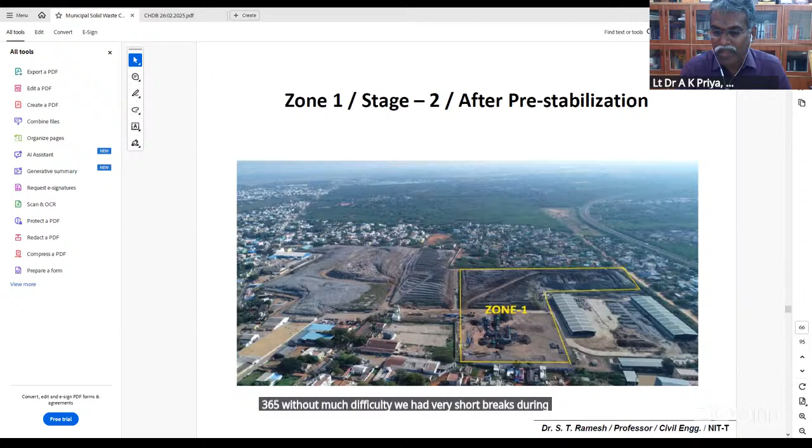Imagine our situation - I could make my plant work for 1,000 tons per day, so almost 30 or 45 windrows with 1,000 tons would be ready for subsequent operation. We managed with effective inventory management. The plant has run almost 365 days without much difficulty, with only short breaks during the Corona lockdown period, and beyond that we operated without much difficulty.

Now you can see how Zone 1 has changed, now appearing with dark brown color. These are all the disturbed solid waste, and here and there you can see a lot of windrows being formed. These are all the mined fractions - one is bio-earth, that soil-like material.

We have also given a deadline, and the vendor has to clear the sites without much difficulty, whatever is being mined out, within a maximum period of one month. Only then will certifications be given and the vendor recommended for payment. So this is again a big challenge for us.

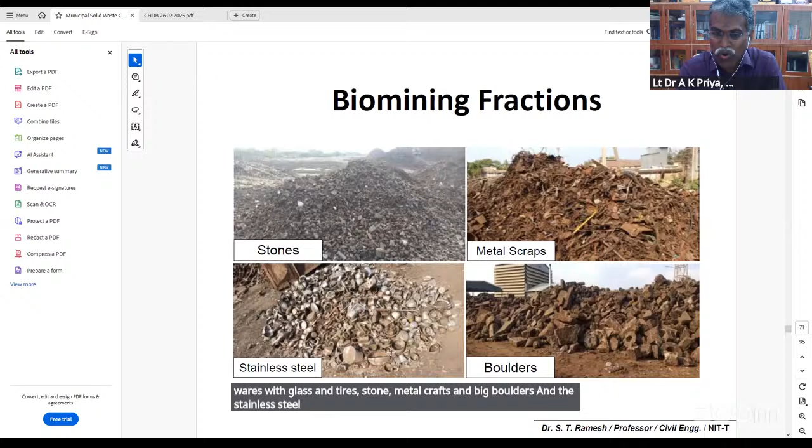Now you could see different mined fractions like PET bottles, footwear, glass, tires, stone, metal scraps, big boulders, stainless steel, and so on. That will be given to the respective recycling vendor, and without much difficulty it will go off, since it may have some sort of recyclable value.

It's possible. So for RDF loading, imagine our situation: Trichy is nearby, and we could attempt a lot of cement plants nearby, but in some cases sending this RDF to cities is somewhat difficult, and it also leads to a lot of transportation cost.

Trichy is lucky enough, and we could meet the demands with respect to Ariyalur and other nearby cement plants. We are also in a position to send this RDF to Maharashtra if there are huge peak demands. This is the RDF loading to the cement plant.

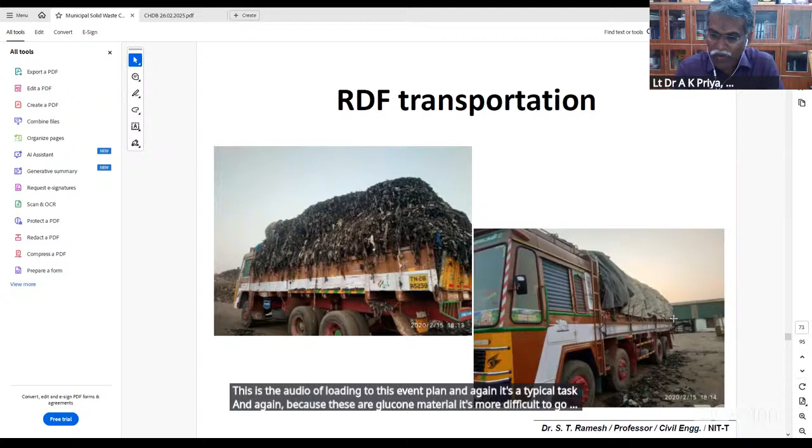And again, it's a typical task, and because this is loosened material, it's somewhat difficult to go for compaction. Somehow we manage and send it to a cement plant.

There are some density measurements, because the small box for a vehicle is not okay, and we also demonstrate with each vehicle. So on site there are, say, 5-6 vehicles, and they may also go for repeated loadings. The main problem with vehicle density measurement is I may not be in a position to fix it, even though the volume is known.

It is somewhat difficult to fill the legacy waste into a required rectangular or full format - it's very, very difficult. So we have gone with an approximation, and we have established a clear-cut maximum and minimum density of the solid waste with respect to the system.

That is almost 640 kilogram per meter cube to 870 kilogram per meter cube. So on a trial and error basis, we fixed the average density at almost 0.76. With extensive density measurements, the government has now agreed to have some measurements, and I guess it has been changed to a weight basis, not a volume basis.

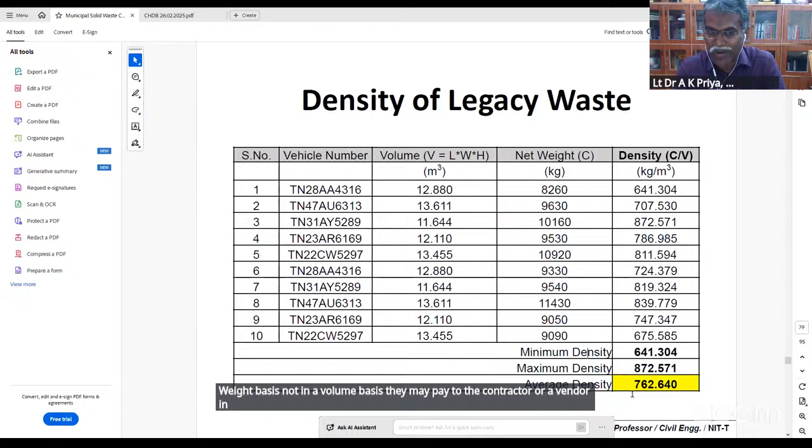They may pay the contractor or vendor on a metric ton basis - that's what has now been recommended by the government. And for RDF also, we have checked the density before getting it into a cement plant; we had some trials and we could check it and so on.

These are all the mined fractions, and we showcased them in different forums. It was very challenging for me to execute the task, because this money has been given to the corporation, the vendor is being fixed, and the monitoring agency is NIT Tiruchirappalli. We had a very hectic time learning and implementing it in the field.

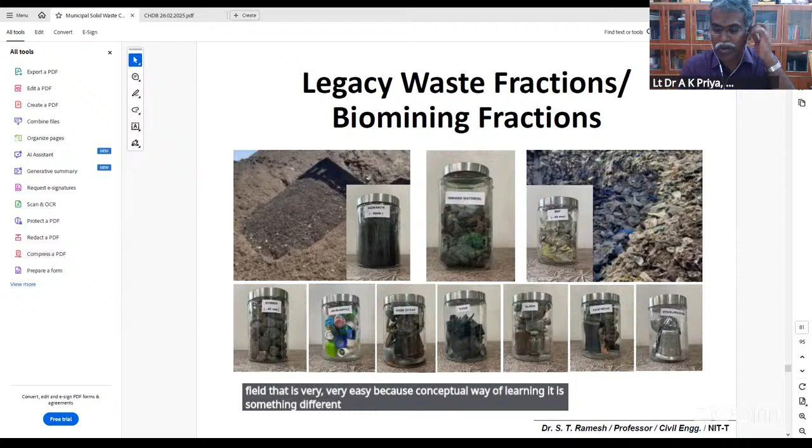That is very easy, because conceptually learning is something different, but actual implementation in the field is very, very tough. We could manage and showcase these different logics to people in the municipal administration of Tamil Nadu, the secretary, and the DMA, and they completely appreciated it, because a technical institute like NIT Trichy has taken care of the nearby site.

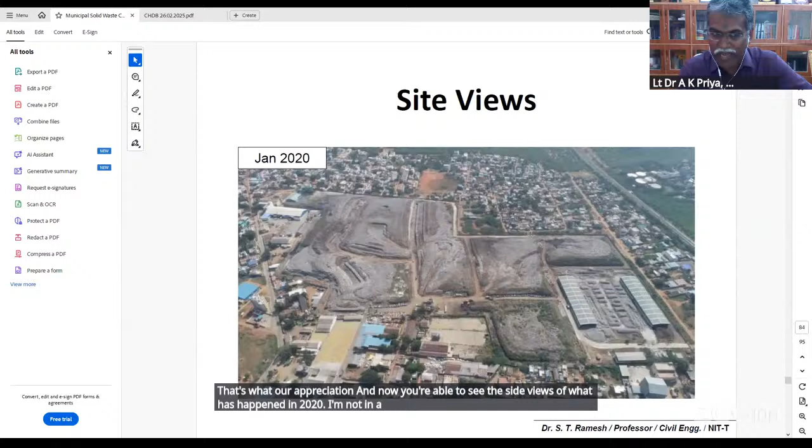That's our appreciation. Now you could see the site views of what happened in 2020. I'm not in a position to give all photographs, but I have taken year-wise views: January 2020, 2021, January 2022, and September 2022. Almost area 1, zone 1, zone 2, and zone 3 have been completely reclaimed, and phase 1 is completed.

After phase 1, seeing the success of this landfill mining activity, the government proposed to go for phase 2 mining, which we also completed. After phase 2 completion, all 47 acres of land had been completely cleared.

There are a lot of challenges, especially since 47 acres near the highway makes things very difficult. Urban local bodies, municipalities or corporations, were not in a position to find other sites for disposal again. It's very, very difficult.

So this site has been identified for other projects like warehouses, and the reclaimed land can also be used for recreational purposes and so on. We recommended going for mining of the solid waste below the ground as well.

As a one-go process, we can completely say the site is fully reclaimed, with no problems of contamination or leachate migration into the ground. That is what we recommended in phase 3, though there are a lot of challenges there.

Again, how to monitor or take measurements below the ground was the bigger task. We devised a mechanism called the resistivity survey method, similar to what soil mechanics people use.

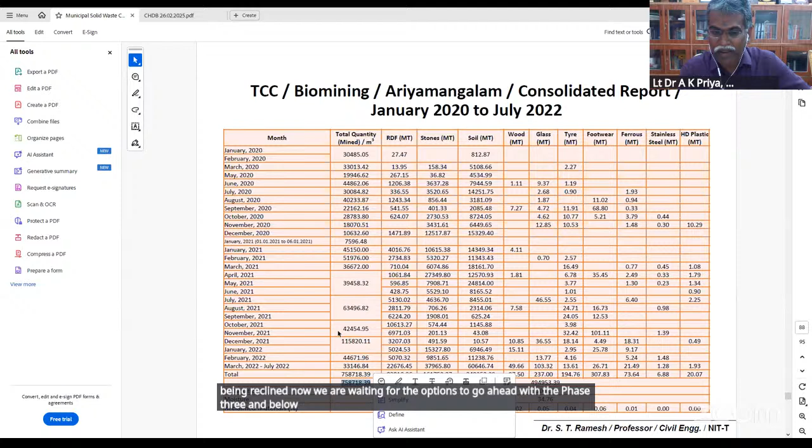There are percentages like 16 to 17% RDF, and about 50% soil-like material—actually 30 to 40% soil-like material—along with other fractions and so on.

So we have demonstrated the process at the site: phase 1 completed, phase 2 completed, and in phase 3 we showcased the unique method of measurements below ground level, and submitted the report to the government. The soil-like material was taken into further consideration and converted into a block.

Now it has been showcased in different forums, and also projected through some inventive startups and technology transfer. I'm happy to say we are also showcasing the next level of making a product industry.

We could manage converting the soil-like material into a product, and we also had dialogue with cement plants—after RDF destruction you get ash, and the ash can also be converted into building blocks and so on. So thereby it becomes like a circular economy.

This is my conclusion: legacy waste, even though it has a lot of ill effects, can be managed by simple mining or capping. I haven't touched on capping here, but there are a lot of challenges and also appreciable results. We have demonstrated 2 projects in Tamil Nadu, one in Tirunelveli and another in Salem.

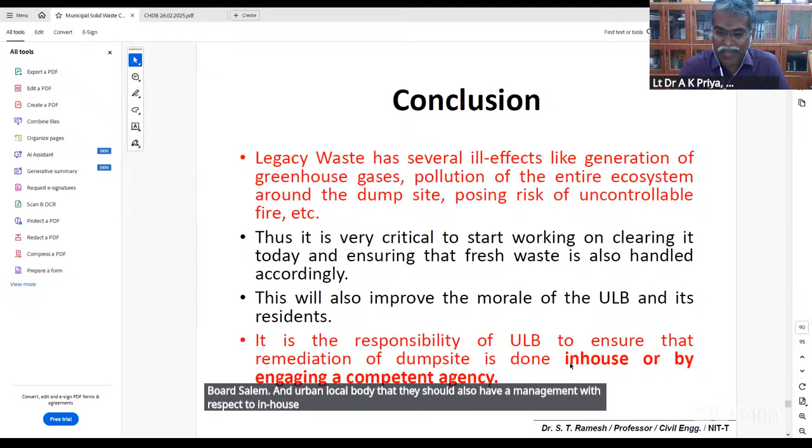Urban local bodies should also have management with an in-house competent agency. There are 5 models proposed to go ahead with these biomining concepts in urban local bodies and corporations, taking care of various types of waste.

That includes dry waste, soil conditioner, hazardous materials, biomedical waste, construction and demolition waste, and e-waste, and so on. The logic is that urban local bodies need to understand the accumulation of solid waste in a particular locality and make complete policies on collection, handling, processing, and mixed waste.

Now the government of Tamil Nadu has given enough funding to all urban local bodies, and I think most sites in Tamil Nadu have initiated biomining activity. One recent activity is in Chennai, where they have started 2 major plants at dumping sites.

One is in Perungudi, another in Kodungaiyur. I believe Coimbatore has also started mining activity at major sites, as well as Vellore and so on. Now they have been given a target, and I think they will be able to finish off all the legacy waste lying at these sites.

The urban local bodies have given a task to at least vacate the land, and get ready for taking care of future waste which is not recyclable. So that's what the logic is now, and government has also initiated a lot of waste to energy plants. Trichy has got a technical feasibility report to go ahead with the waste to energy plant. These days are not far away - probably you could manage generated solid waste with a lot of technologies mentioned, and in a short period of time witness this in different urban local bodies and corporations.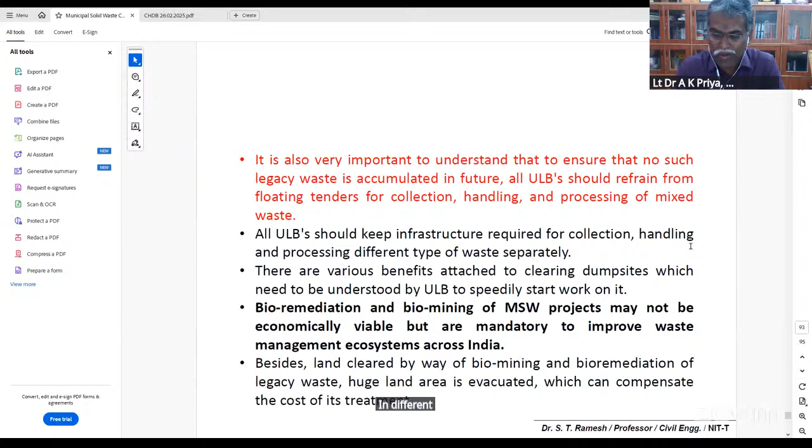I have submitted our credentials to Government of Tamil Nadu, and they have given me a champion award in 2021. I'm happy to be part of smart city initiatives in Tiruchirappalli, and now we are waiting for better options for waste to energy plants, and conversion of unwanted material like soil-like material into blocks, and even ash into building block components. We are also waiting for new initiatives and incineration plants in Tiruchirappalli city.

Thanks to Government of Tamil Nadu - they also gave huge investments to urban local bodies and corporations to initiate capping and mining projects. I was part of the smart city member in Tiruchirappalli, thanks to Tiruchirappalli City Corporation. Most of the learning I've gained is only through practical implementation of these strategies. Thanks to NIT Tiruchirappalli, they have given me a lot of freedom to execute government and public interest projects in Tamil Nadu.

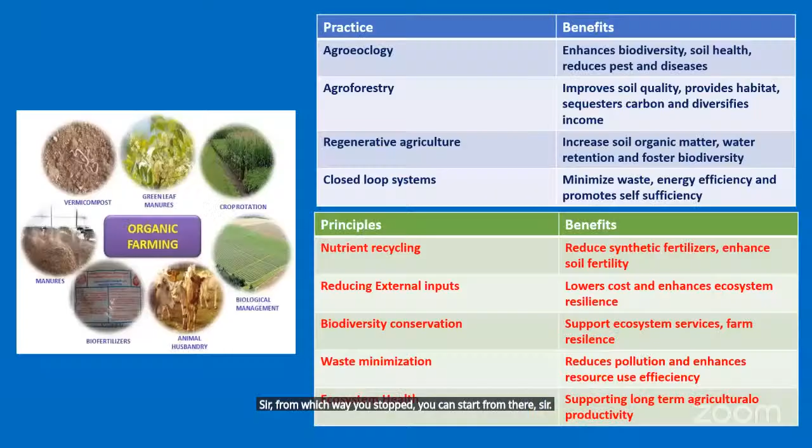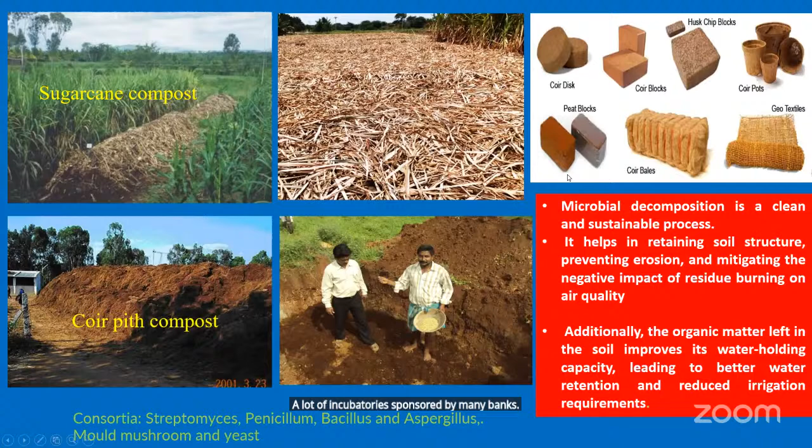Now, in particular about circular economy in sugarcane, since I'm currently working in sugarcane, let's see how circular economy practices can help the sugarcane-based agro industry. India's sugarcane is grown in 5 million hectares, with cane production of 300 million tons and sugar production of 30 million tons. This 300 million tons leaves at least 30 million tons of sugarcane bagasse.

Sugarcane bagasse is the leftover fibrous material when sugarcane is used in the sugar industry. Every season, 30 million tons of bagasse is wasted and is very difficult to dispose of. Also, ethanol production in our country depends entirely on sugarcane, as we produce 3,650 million liters of ethanol every year, which contributes 73% of bioethanol produced from sugarcane. Maize and rice contribute the remaining 27%, but 73% of ethanol production comes from sugarcane.

The number of sugar mills operating in India is 720. All these mills are producing a lot of agro-industry based waste like bagasse, press mud, and molasses. All of this can be recycled and converted into value-added products.

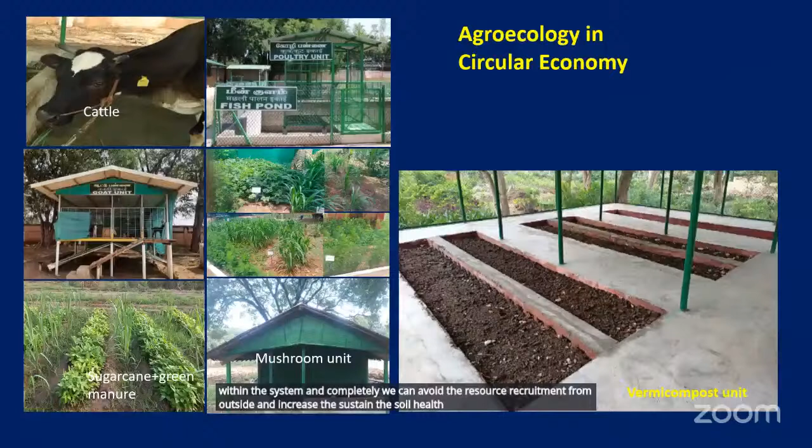When we combine many agri enterprises, growing sugarcane alone is one enterprise. If we compare it, suppose we have 1 hectare of field - 0.9 hectares can grow sugarcane with legume crops like black gram, and 0.1 hectares can be distributed to many agri-based enterprises like fodder, stall-fed goatry, dairy with 3 or 4 cattle, vermicompost unit, poultry, and fish. Then all resources flow within it - it's a closed loop system. Nothing goes out as waste, and nothing is brought in from outside.

For example, sugarcane supplies fodder, because sugarcane tops are good fodder that can be fed to the goat or dairy. In turn, dairy gives farmyard manure to sugarcane, and the goat also gives manure to sugarcane. The fodder unit supplies fodder to the dairy and goat unit. Sugarcane also gives its dried leaves, or chaff, which is sourced for vermicomposting - sugarcane trash can be composted using earthworms, called vermicompost.

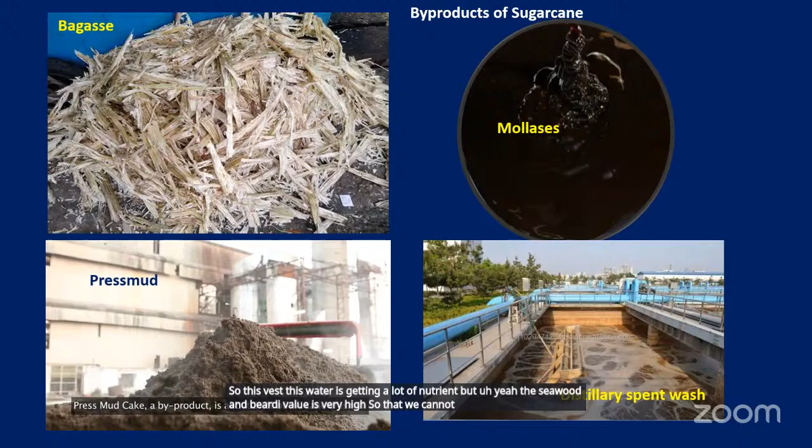Fourth, from the molasses we distill ethanol or spirit, and a lot of spent wash water is generated - for every 1 liter of spirit, 13 liters of water is wasted. This waste water contains a lot of nutrients, but the COD and BOD value is very high, so we cannot use it directly unless it is treated.

So coming to how we can utilize this sugarcane based agro-industries waste for our circular economy. First is use of bagasse.

Since it is not used for cogeneration of power in the factory, we can divert it into many products. First, we can make a briquette from a carbonized bagasse combined with molasses and clay. It has high energy value - every gram gives 4,000 calories. So it has very good energy value. We can make bagasse based briquettes.

Second, like sugarcane leaf, we can make compost and grow mushroom. From bagasse also we can make compost for growing oyster mushroom. This oyster mushroom grown from sugarcane, we found that it has 25% higher protein compared to mushroom grown from other agri-based waste.

And third, most of this bagasse is going for print papers. This sugarcane bagasse has 37% hemicellulose, 32% cellulose, and 20% lignin. So it is good for making paper.

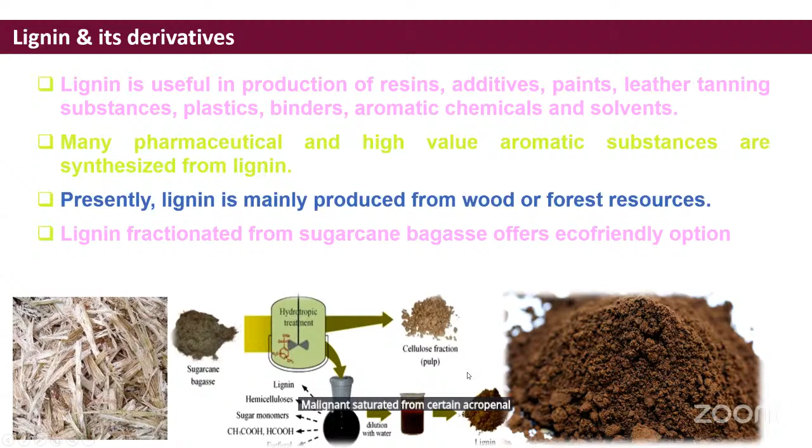And another product we can make from bagasse is paper plates. Now there's growing concern about eco-friendly alternatives and plastic waste. The bagasse is more and more being diverted into plates and cup making because it is entirely very safe for humans and for the environment also.

Because simply we can fraction this bagasse and make it into a liquid form, and using high pressure and temperature we can mold it into any shape. If needed, we can add some starch and make very good paper plates.

And once we consume the food, it need not be thrown out - it can be fed to cattle. So even the paper plate, it's not wasted - it can be recycled for cattle food. Whereas all other paper plates based on chemicals will be wasted, this can be entirely utilized with no wastage.

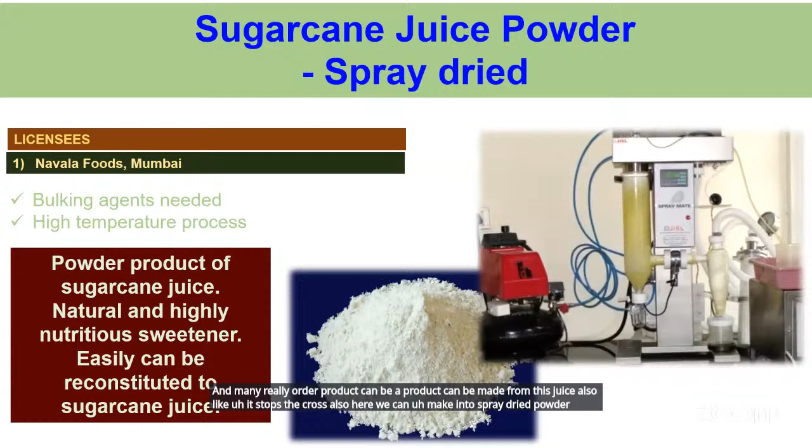And many value-added products can be made from this juice also, like instead of sucrose or sugar, we can make spray dried powder so that the entire juice quality is maintained. And also this freeze dried sugar - in sugar industry, the entire juice is converted into sucrose.

But here the sucrose is extracted from sugarcane juice in crystallized form, whereas here the entire juice is converted into spray dried form. So the quality of the dried product is better than sucrose or white sugar, whatever we are getting from the market, because all the nutrition quality of the juice is maintained here.

And the excess juice can be added to sugarcane jam. We know that many cane jams available in the market are 50% pulp, which has natural flavorings, and 50% only white sugar, sucrose. But here, we are not adding any sugar at all - the entire juice is converted into cane jam by adding some natural flavoring.

So its glycemic index is very low compared to any jam available in the market. The texture is also good, and we can infuse it with many flavors. Now this jam is available in the Amazon market also, cane jam.

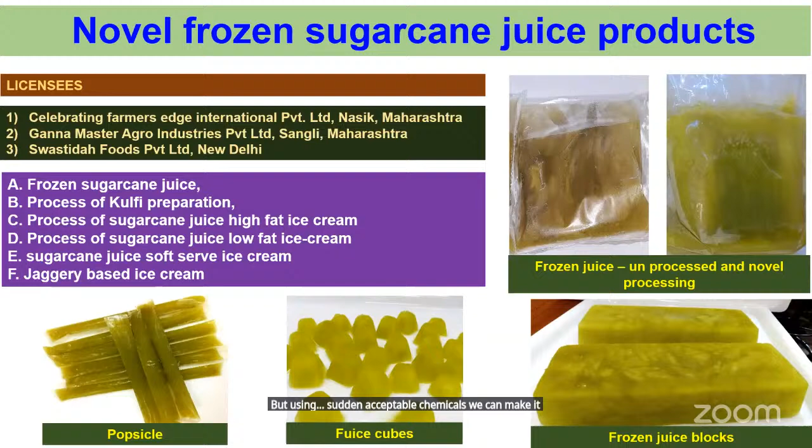Many value-added products with juice we can make, because sugarcane juice cannot be kept more than 2 hours - the quality will deteriorate and turn black. But using certain acceptable chemicals, we can make it into popsicles and juice cubes, frozen juice blocks - we can make it.

Another use of bagasse waste is fortified food items, because it's a very good fiber. Sugarcane fiber is very good for human consumption. We can make fine fiber out of this bagasse. This processed bagasse powder can be blended into cookies, cake, rusk, and bread at 5 to 10%, so that it becomes a healthy food.

The leftover leaves can also be converted into fodder for cattle. We can preserve it for a month or more by silage. To increase the shelf life, it is ensiled with the addition of 1 to 5% urea, ammonium sulfate, and molasses in polybags in concrete slabs under anaerobic conditions. It can then be stored for 2 years, otherwise it will spoil within 2 months.

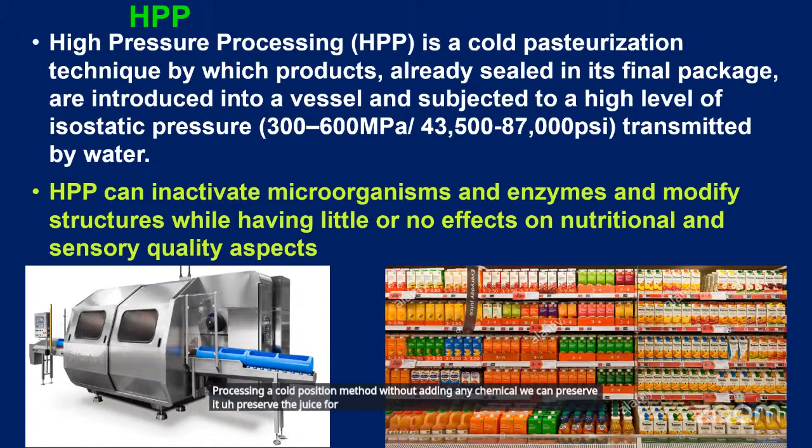HPP, high pressure processing, is a cold pasteurization method. Without adding any chemical, we can preserve the juice for more than a year using this technology. This is also becoming popular.

Another byproduct in the sugar industry is molasses. After crystallizing sucrose from juice, the waste liquid is called molasses. This waste product has many values. It can be converted into many value-added products, mainly used for industrial production of various substances by fermentation, used for sweetening and flavoring foods, and used as animal feed and additives.

In alcohol industries, ethanol can be produced by simply fermenting with yeast - no pre-treatment or hydrolysis is required, compared to starch-based ethanol production where we have to go for pre-treatment or hydrolysis process. This process can be completely avoided here. Directly we can go for fermentation with yeast, and it can be distilled as spirit, 96% spirit, or 100% ethanol.

Currently, almost 4,000 million liters of ethanol is produced. It was not sufficient because the government of India's ethanol blending target with petrol is 20%. So far we've achieved 15% blending of petrol with ethanol. There is still scope for increasing to 20%. In some other countries, more than 40% blending is there. But we don't have that much biomass. So in future, if we increase the area or develop varieties which produce not only more sugar but more bagasse, maybe sufficient ethanol can be produced.

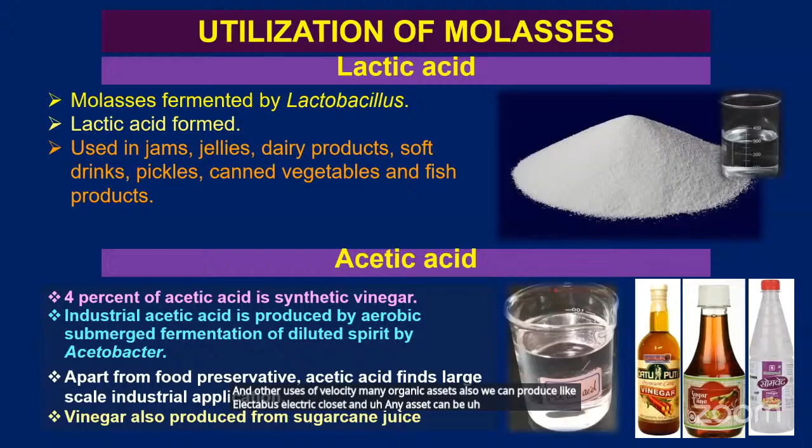And it's a good feed material for yeast, and yeast can be produced for baking industries.

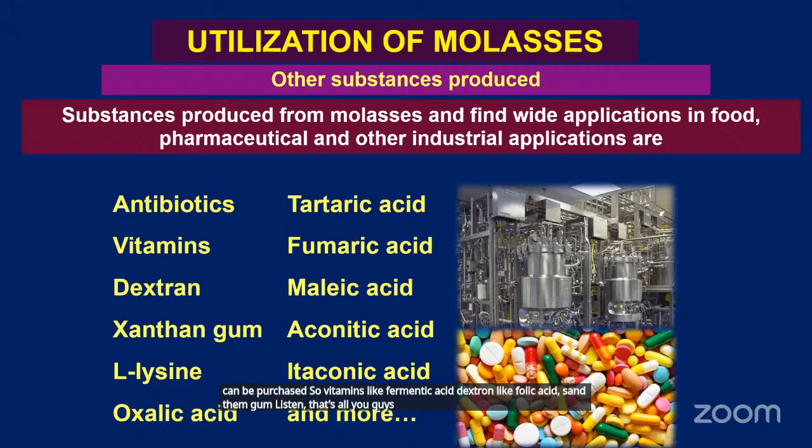A lot of antibiotics and other pharmaceutical products can also be produced from this molasses, like antibiotics, tartaric acids, vitamins, fumaric acid, dextran, maleic acid, xanthan gum, lysine, itaconic acid. Everything can be produced from sugarcane based byproducts.

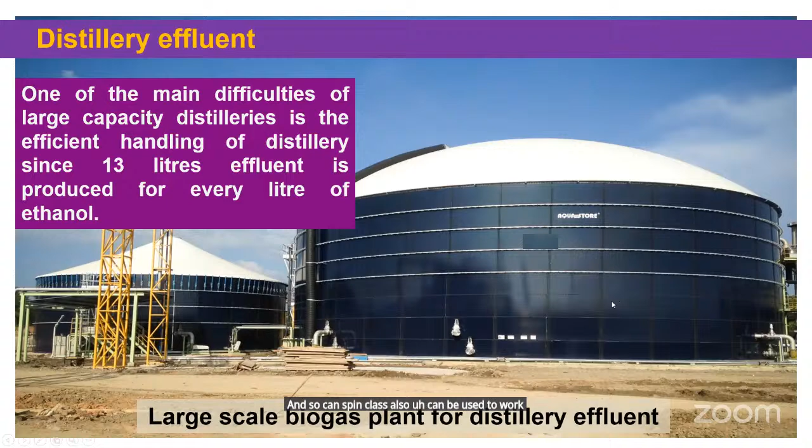After we filter molasses, the leftover material can be utilized in many ways. One application is wax can be extracted from the press mud, and this press mud can be utilized for biofuel like methane, and after treating it can be used for compost preparation. Biogas from press mud and biocompost from press mud can be made, and spent wash effluent can also be used for making biogas.

This circular economy is a solution to waste reduction and sustaining environment and productive income. The challenge of processing from linear to circular economy is still ongoing and requires the development and application of new knowledge and deep innovative technology. So that with the cooperation of environmental engineers, microbiologists, and biochemists, we can make agricultural waste into more useful products. Thank you very much.